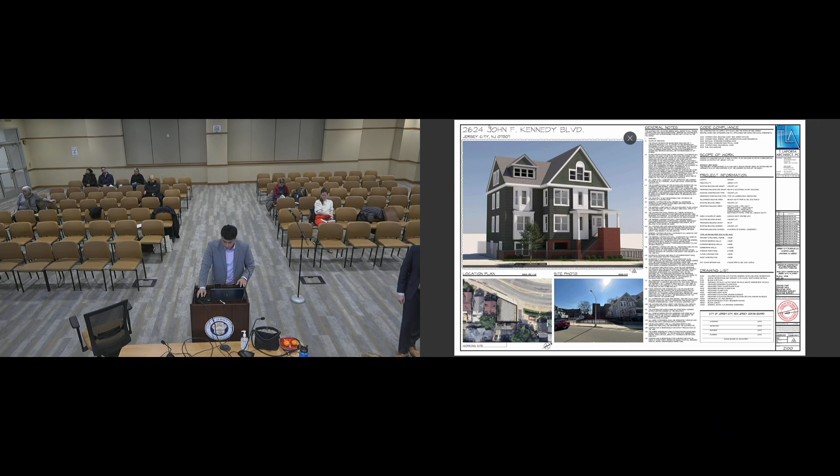Not over the weekend, but since the last meeting. Okay. Yes. All right, so am I clear to move forward? Yes, go. Okay, well, good evening everyone, I'm happy to see everyone once again. My name is Martin Moreno, as previously stated.

I'm here to speak about the revisions made to our project at 2624 John F. Kennedy Boulevard. Most of the changes were to the exterior of the building, including materials, colors, and some landscaping, based on the comments received at last month's meeting.

One of the comments that was very much stressed from both the December and the January meeting was the use of red brick. I believe it was Commissioner Bryan who brought that up. We found that in regard to the context of the neighboring buildings, the beige or light brown brick we were originally pushing didn't work as well. We decided to explore the possibility of red brick, and by doing so, we landed on using a green color for the siding, since green is a complementary color to red. That's something that worked well with the building, so we decided to move forward with it.

So the first big changes I'll touch on are the color changes, from the brown to the red brick, as you see in the lower portion of the building, following my cursor, and the green siding applied to the top floors of the building.

If you recall, we originally proposed blue and white siding for the principal bump-out area you see here, with blue siding and the recessed part of the building proposed as white siding. After we spoke with, apologies, I can't remember his name, Commissioner Sakong, I believe, he spoke about the use of paneling and how to better improve the differentiation of colors in the facade.

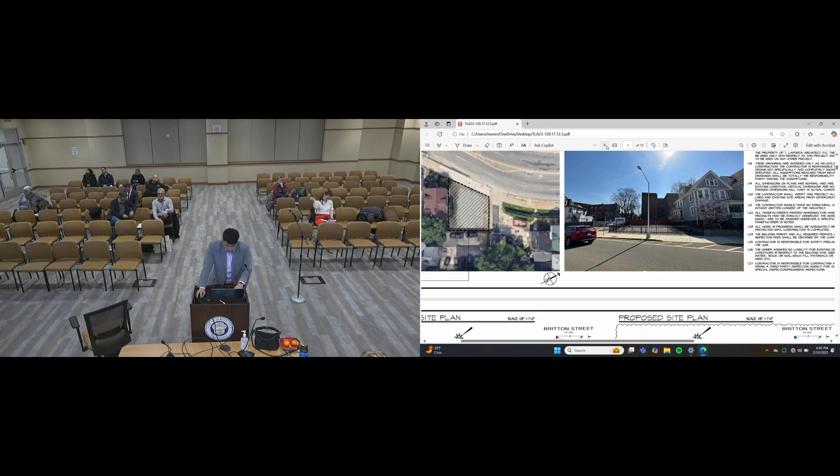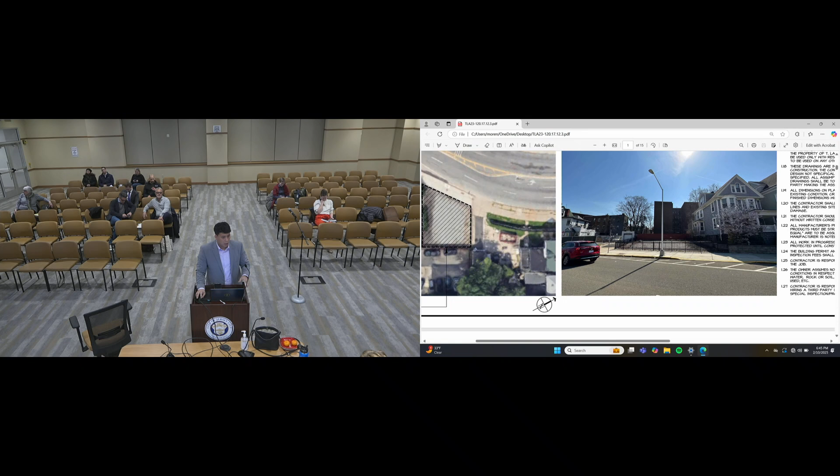If I zoom in, you can see on our neighboring building directly next to us, their bump outs on both buildings are full white cladding. It really helps differentiate from the overall grayish, bluish siding of the principal building, as well as these larger white trimmings.

Also helps the windows and different shapes differentiate from the primary color of the building. We decided to incorporate that into our project, doing both bump outs on the right and left with a similar white paneling system, and added larger trimmings around the windows to help those stand out. We had also previously proposed sandstone for the window color, but decided to make it white all around, because the sandstone didn't mesh well with the larger white trimming.

In addition, Commissioner Bryan spoke about possibly lowering the Hardie panel down a little more, to help eliminate some of the use of brick so it's not very brick heavy at the lower part of the building. We took that to heart and incorporated it here, and we felt it worked well. It really helps eliminate the heavy brick accent on the recessed part of the facade.

We also added some vegetation, as previously discussed, to help limit the brick from both the bottom and the top. Commissioner Amatuzo talked about replacing the columns in the front with a stronger brick accent, so we went ahead and did that. It's something found on the building three doors down.

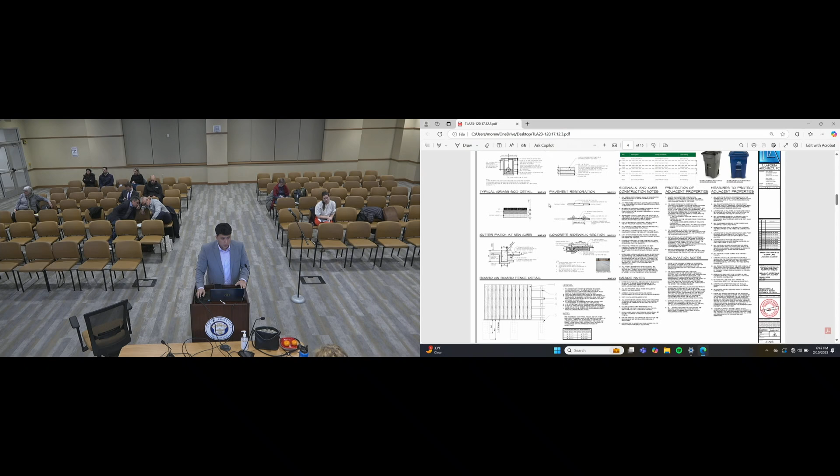As I move to the next elevation sheet, I'll highlight that. That's pretty much a quick recap of the changes made to the exterior. As mentioned, we didn't make much changes to the interior layouts of the building, so I'll move forward to the elevation sheets.

There were multiple comments about the legibility of the drawings, how they were sometimes a little hard to read given that they were 2D black and white drawings. So we decided to incorporate some coloring and add a little shading to help differentiate the different surfaces of the building.

Here it's a little clearer regarding the columns I just mentioned. As you recall, we originally had white posts holding up the extrusion of the building. We decided to change that and replace it with a much larger brick base, about 16 inches by 16 inches, something we pulled from the neighboring house two doors down. As you see, they also have a very similar feature.

Let me zoom in. They have a similar feature, not necessarily an arch, but a large brick lintel with a larger brick post on the side. So we decided to incorporate that similar accent into our building in place of those white posts we originally had.

Moving on to the side elevations, you can see how we originally had the brick going up towards the first floor. We've lowered that and added more siding, reducing the use of brick to help eliminate that strong brick accent at the bottom. We also brought that red accent all the way across instead of the previous brown brick, to match the neighboring red accents of the buildings.

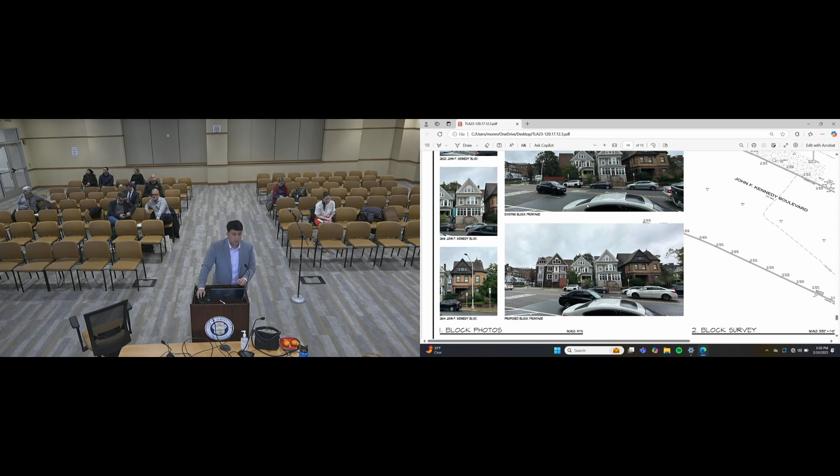Moving on to the streetscape, showing the building in context with neighboring buildings. We decided to take the rendering of the front part of the building and superimpose it onto the existing streetscape, just to give a better idea of how the new design works in context with the neighboring buildings.

That's more or less it. Martin, just a couple of follow-ups. There were two other changes I noted. One, regarding the style of door and the way the transom worked, I think Commissioner Gunther brought that up. If you could speak to that as well.

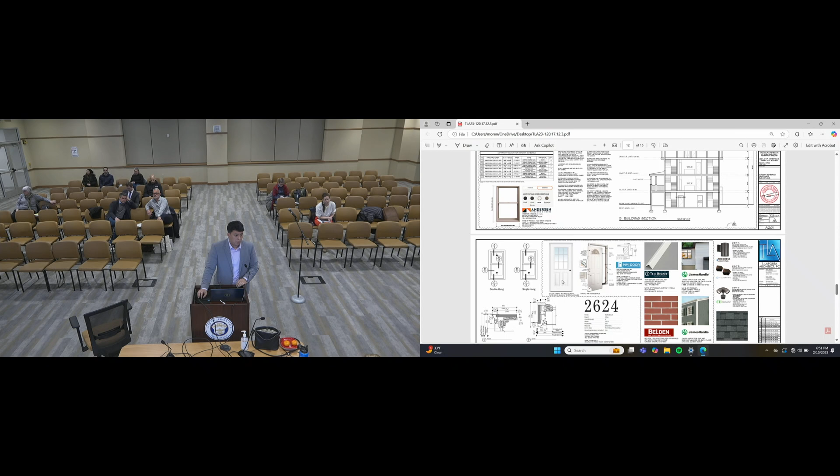I believe it was either Commissioner Gunther or Commissioner Amatuzzo who recommended doing a transom above the door to help give it more of a grander entry feel. So we went ahead and did that, and we also changed the type of door to this more 2-panel pane glass style door. It's a little similar to a barn door type, but we changed it because we felt it worked better with the new design, as well as it being something mentioned in the previous meeting.

And just to clarify, the other door beside it, if you go back to that sheet, that's just to give dimensions. The one on the right is not the actual proposed door, it's just labeled as typical details for this brand of door. This is something found in most spec sheets, regardless of what door you choose—they provide typical details for all the doors of that manufacturing company.

The last question is regarding the CMU wall—we had gone back and forth proposing it and removing it. Where does that stand based on the commissioners' comments at the last meeting? I believe based off the last meeting we felt it was best to move forward without the CMU wall and do the railing instead. As you can see here, we incorporated it into the proposed streetscape study to give a better sense of what it looks like in context, and we also added it to our rendering.

Going back to the initial rendering, we did add the railing going across the front. This low transparency point you see in the bottom left-hand corner is meant to show the fence, because we have a 6-foot white board-on-board fence going all the way around. We originally added the fence to the rendering, but felt it was covering up the window, so we made it a little transparent so the windows were more legible.

I will just note, it is written in supplementary zoning that the recommended floor to ceiling is 9 feet. Applicants have asked for less, and they are correct that the preference is general, it's recommended, not required. Plenty of applicants have come to this board before with floor to ceiling heights of less than 9 and have been approved with that. However, they are correct that they do have to go to zoning board after this, and zoning board is absolutely going to turn around and ask why their floor to ceilings aren't 9 feet.

I just think it's too tall, and the base of the building is tall. And I know you've made some moves, but it seems like reducing the ceiling height will help reduce the size of the building. As I've said before, you can see it on this streetscape. The prevailing design is a pedimented 3-story building with a basement, and I know you're putting a unit at the bottom floor, and that's causing it to be a little taller at the base than what you typically see throughout this historic district. I'm just concerned about the height.

And the other thing, I know we have these elevations, and you have a separate rendering of the building, but what I don't see, which maybe would help me feel better, is a rendering of what this will look like in the context, like at eye level.

Well, it's not necessarily a rendering, Commissioner, it's more of a superimposed photo that I previously highlighted. This was scaled to match the property. I guess for Commissioner Gunther, that is marked to scale. That is an accurate depiction.

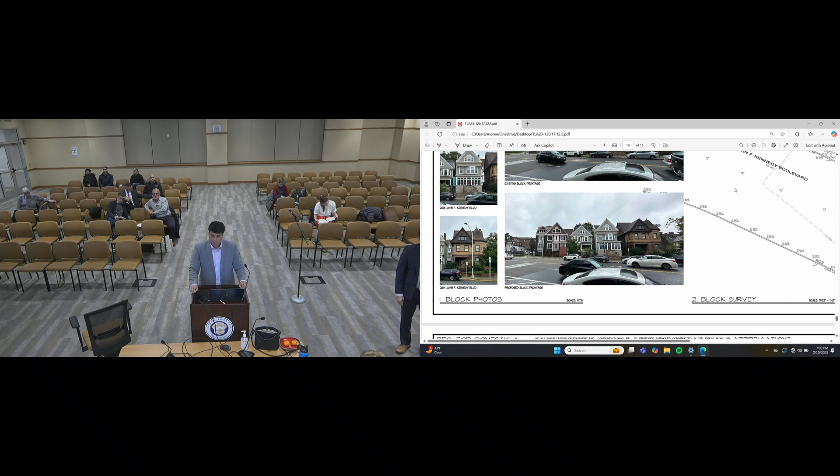I have a question for you. I like the transition to the red brick. It doesn't feel like the house is floating on a blonde foundation, it feels more grounded. I definitely like the solid all-green siding instead of the variation in color. My problem still lies with the columns across the front of the house - the extra tall one on the left versus the two short ones on the porch just seemed too imbalanced.

I was wondering if maybe putting a railing between the two porch columns, like the neighboring house has, would rectify that situation of the column on the left feeling too tall and too big, and the other ones feeling too short. Are you suggesting a railing there, like the neighboring house to the right has, with the two columns and a railing in between?

Commissioner, we had that before. Oh, you did? Yeah, and it was recommended that we change it to this. Okay, I don't remember that.

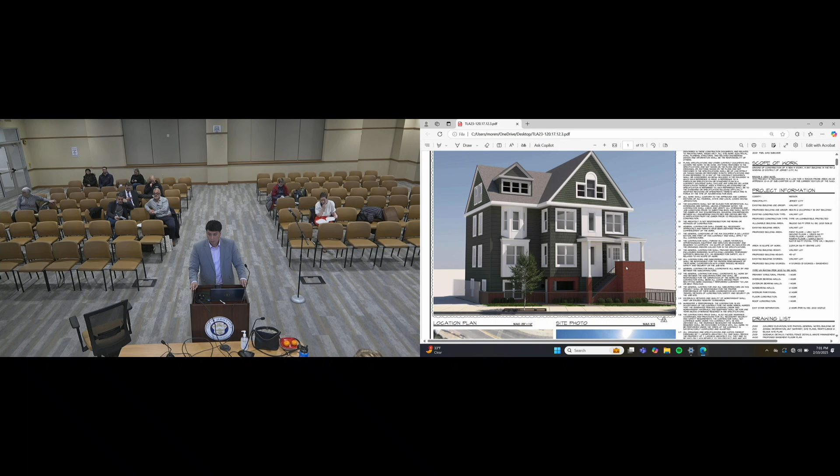And my other question is, this house is quite stately - I'm still not sold on the front door. It looks like a Home Depot off-the-shelf front door. I think that, like any entrance to a beautiful home, it should make a statement. This says to me that we found this great door at the Home Depot.

I understand, and I think it should look more like it's in context to the neighborhood. Maybe one big, beautiful wooden door with a side light or something else, but this just looks too big box to me.

Understood, but just to plead our case, the manufacturer is MMI, which is not a standard manufacturing door company. I'm not saying you can't get that at Home Depot, but to argue the point, we went with a specific manufacturer not very used for a common standard home. We decided to go with this barn door look because we felt it was a bit more traditional and fit well with the context of the neighboring buildings. But if you are still not satisfied, we have no issue trying an alternative.

Yeah, I understand you went to a company that makes it special, but it doesn't look special. Understood, it looks like big box.

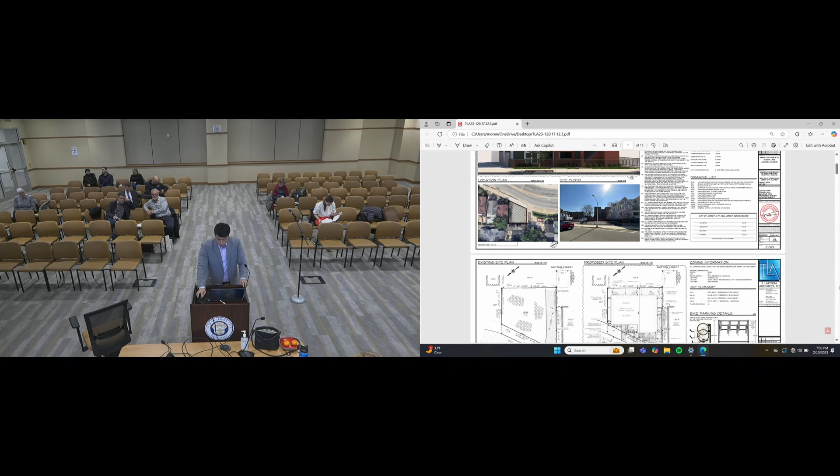Commissioner, is there a particular design you have in mind? Something with one window instead of a divided side light, like an old-fashioned door with one window and maybe some panels, instead of the grill on the front with the 9-light division. Right, because this is a 2-panel glass door per the specifications here. So rather than the 9-light thing that makes it look like it's coming off the shelf from Home Depot. Got it.

We had a development on Sherman Place, and they used HardiePlank siding and did all that, but they used a beautiful custom 3-foot wood door that looked like it belonged in context to the neighborhood. This does not look like that at all.

Sure, we can also look once again at the neighboring doors, the doors of the neighboring homes. I know two doors down has just a solid door. Yeah, as you can see here, let me zoom in real quick.

Two doors down just has a solid door. Yeah, that's not historic, the porch has been closed in, so that's not really a historic door. But maybe the house on the corner would give you a better indication.

The house on the corner is a little similar to the one that we had chosen. I think the one that's more unique is our immediate neighbor, which has a sort of oval-shaped window. So that's something we can see if we can come up with a better alternative for. Okay, yeah, I agree with Commissioner Amatuzzo.

It should be a wood door. It should be, or with a raised panel and maybe the side light. I don't know about the transom, but that maybe. But it's materially not appropriate for an entrance door.

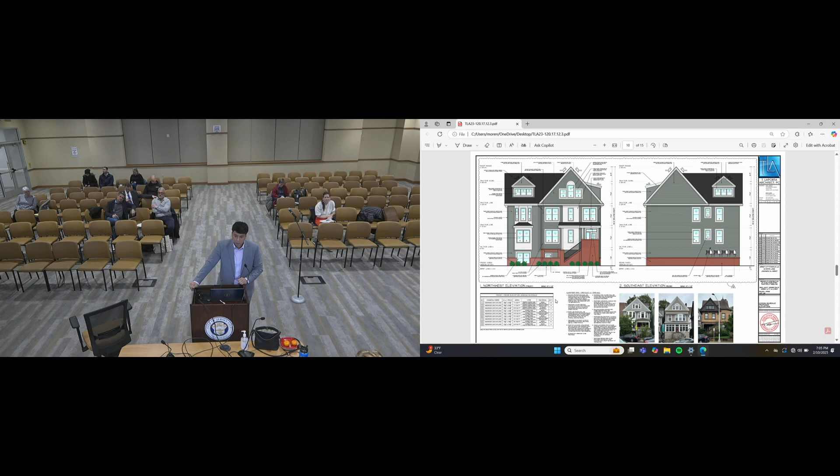So we'll take another look at that. I think just because of the style of the house and the neighborhood, it needs to be a little bit fancier looking. Understood, more like a home door than I don't know, it just doesn't fit. So a change there would be great.

Thank you. So I agree with the comments of Commissioners Gunther and Amatuzzo. My first impression upon seeing this revised design is that it's definitely a big improvement. I'm pleased to see a lot of these changes. The thing that struck me, however, was the use of the white cladding, which you said is bold and strong based on some of the neighboring properties. I do see that in the photos you shared.

But there are those two sections of the building, just to the left of the main entrance most prominently, and then on the extreme left of the front facade - that's a lot of white cladding, just broad expanses of it. I wonder if you might have gone a little too far with the white cladding. To me it seems a little odd, and I might prefer to see that pared down a bit, but I'd also be curious to hear what the other commissioners think.

To me it seems odd. Well, I would agree with Commissioner Gordon. One of the alternatives we tried was to do more of a solid green all the way around, including the bump outs, and then once again utilizing a larger window trim to help differentiate the two colors. So that was the original design we went with.

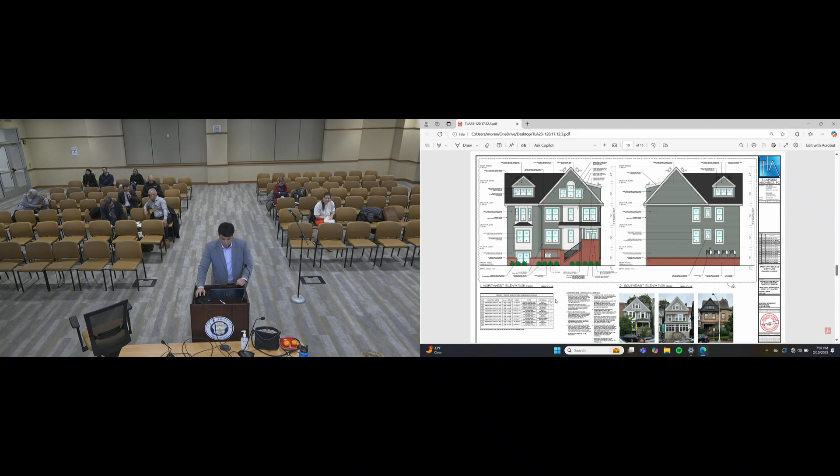One more question regarding that white cladding - is it just flat cladding or is it like a shingle? We're proposing fiber cement panels. So it's just flat and has no embellishment added? It's just a white panel with no embellishments or shingle or any kind of style. It's just flat and white, which I think adds to its largeness.

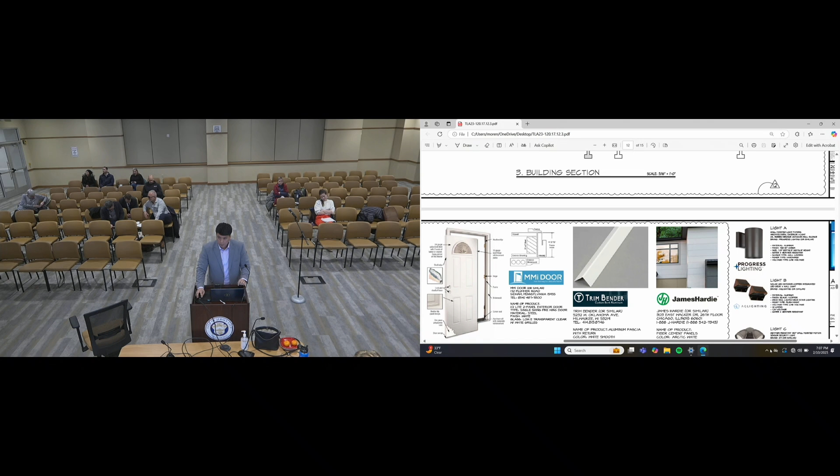Right, so this is a sample that we provided here. It's a smooth white fiber cement panel.

The neighbors had more of a vinyl plastic looking type of panel. We're proposing something a little bit different, but we understand the comment and it's something we can revisit.

Maybe a wider window would help. I'm sorry, Commissioner? Maybe a larger, wider window would help that situation. For which - oh, the bump out, the bulk white that we're just talking about. Sure, where you have a single window, maybe a wider window would help lessen the white cladding.

Yeah, I have some ideas of how we can improve upon it, so I'll definitely take those comments to mind and see what we can do. Yeah, I don't think it needs a dramatic overhaul - I feel like with some tweaking, you could be in a good place.

I was just building on what Paul and Robert were saying about this area of the building. If you used some of the shingle or scallop textures from other parts of the building, that might be enough to break up the intensity of this white part, and maybe add more shadow and texture. That might be enough.

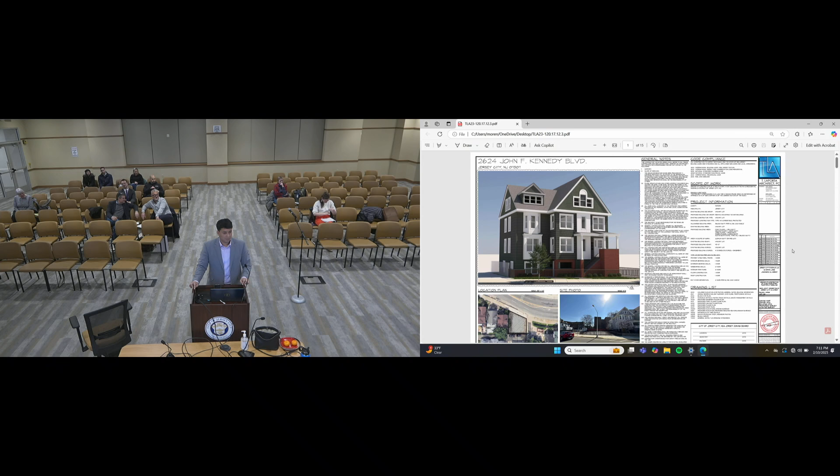Okay, no problem. So if it's okay with you, since I have our planner here, if she can speak to the commission this time, that would be great - I can avoid paying her to come back next time, if that's all right. Sure. Perfect. Okay, thank you. Thanks. Sure.

Raise your right hand. Do you swear or affirm the testimony you're about to give in this proceeding will be the truth, the whole truth, and nothing but the truth? I do. State and spell your full name. It's Carolyn Worstel, for the record. Yep, Carolyn Worstel. Carolyn Worstel. Worstel.

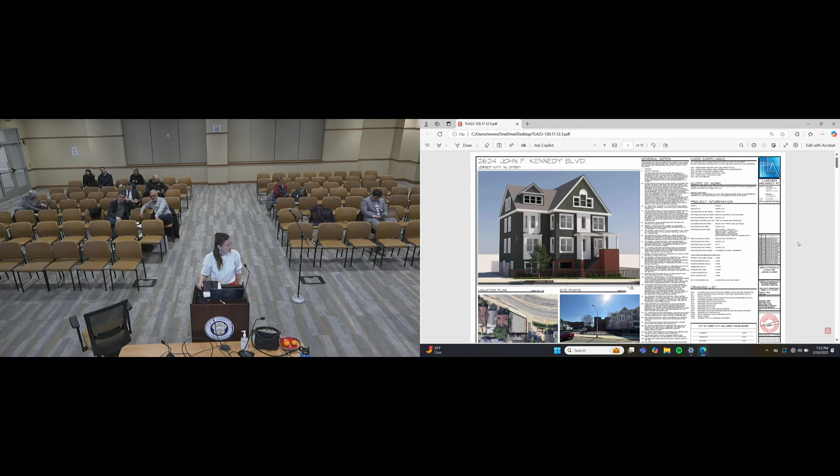Carolyn, if you could please give the commission the benefit of your educational and professional background and the status of your license in the state of New Jersey. Sure, I'm a licensed planner in the state of New Jersey. I have a master's degree in city and regional planning from Rutgers University. I've appeared before the Jersey City Planning and Zoning Board numerous times, and I just don't believe I've yet had the chance to speak before this board. Chair, I would submit Ms. Worstel as an expert in the field of professional planning. The chair recognizes Ms. Worstel as a licensed planner.

Thank you. So Carolyn, recognizing that we are going to be returning with those modifications discussed on the record this evening, to the extent that you can still give your general planning opinion as well as the context of the neighborhood and the project as a whole, that would be greatly appreciated. Yeah, sure, I'd love to.

I've been involved with this project since its very inception, really working with the team to deal with what is, from a planning perspective, a little bit of an odd lot. Everything about the Jersey City zoning ordinance is designed for narrow, deep lots. So when we're presented with a project on a lot like this, we have to say, how do we work with this lot, knowing that no matter what we're going to do, we have to go for variances? Because the lot just doesn't conform in any way, shape, or form to what is typical and what the ordinance was written for.

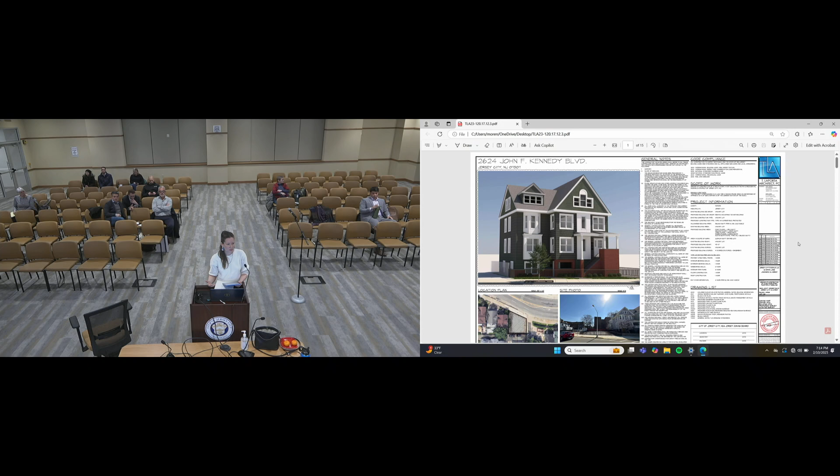And so it creates a pattern along this block where each building is stepped back, and there's this stepping. That was something we looked at when designing this building—we wanted to continue that design style, creating a building that continued that step-back pattern along the block. That was one of the things we really focused on with this design.

We also looked at the fact that we're in an area where our maximum building height is 35 feet, but the buildings here were designed and built at a time when there was no ordinance. So we tried to create a building that is consistent and creates a consistent window pattern, and a roof line that is somewhat similar, focusing on the peaks. That's how we were looking at the context.

We were trying to say, how do we create a building that is consistent with the character of that block, but also acknowledging that we're in a very different design period, with certain code and building standards different than when these other buildings were created. That's where we started in looking at this building and design, and then we really tried to meet a lot of the standards that are there.

In the Jersey City ordinance, there are standards for new construction. It really looks at saying we're not trying to replicate the building that was there—we're not trying to totally recreate the buildings next to us, but we're trying to take the character and create something that seems appropriate along that block.

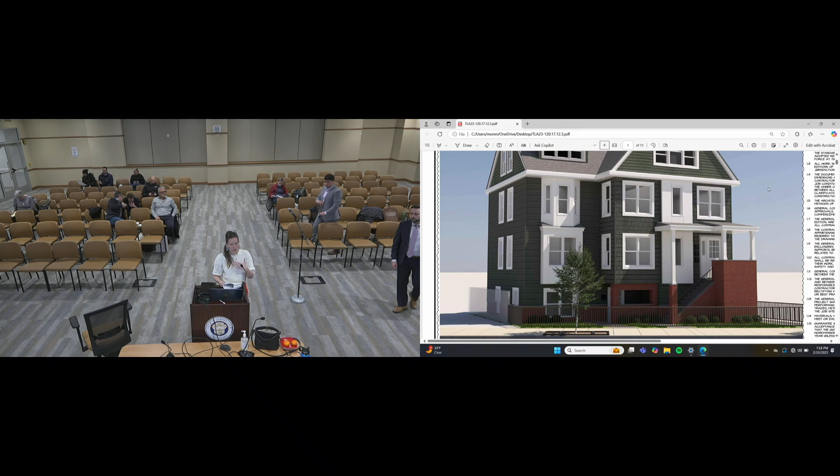Trying to use materials, utilizing the siding to create those textures and patterns very characteristic of the design of the buildings nearby—the roof forms, focusing on making sure we were creating a roof form consistent with a very strong peak, with a strong pediment. Those are all very characteristic of the three other buildings on this block. And then just looking generally at the scale.

None of these buildings are exactly all the same—they're all a little different. So you're not trying to match up and say we need our roof line to exactly match the building next to us, because that's not the character of this block. It's not a row of townhomes that are exactly the same, all built at the same time. This is very characteristic—I was reading while we were doing this, and I was really looking at that West Bergen East Lincoln Park guidelines.

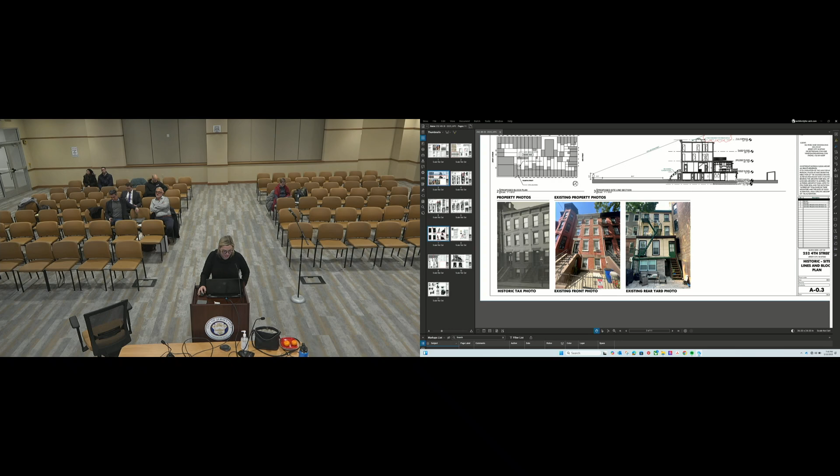Currently, I'll go back to what's existing. Currently there's a little bit of a hodgepodge of additions that have been done prior to the homeowners that are my clients. So we are actually going to demolish the existing addition that is there and add a larger addition to the back. I'm going to show you that in 3D to make it easier.

So you can see the back elevation of the existing facade. A lot of the existing facade on the bottom 2 floors where we're doing the work has already been demolished and removed over time. This addition is to include a 1-bedroom and the kitchen, along with a deck and a privacy screen, because the deck is on the property line on the east side of the property, so it's a zoning requirement now. There is a 5-foot deck off the back of the kitchen, and we will be using the HardiePlank Smooth.

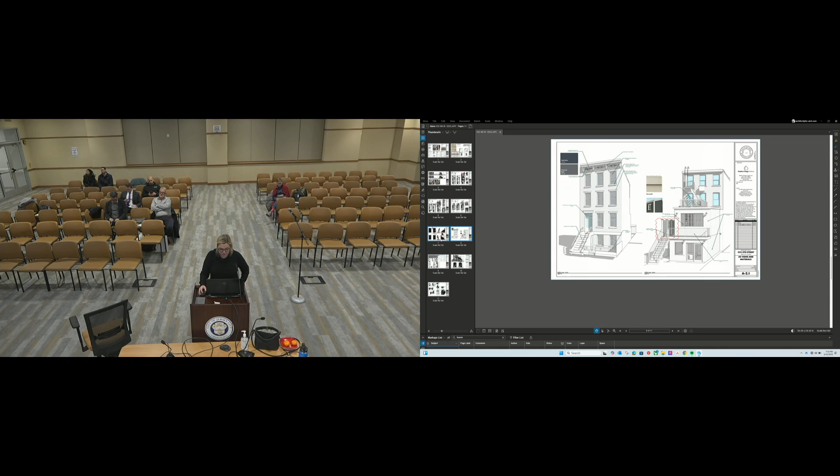I have samples if you'd like to see. It's going to be in the night gray you can see here. If anyone wants to see it, I can bring it to you. And then we are painting the cornice, and also on the front facade, besides the windows, cleaning the sills—they've been painted. So that is the majority of the work we're doing. I can answer any questions if you have.

Any questions? The addition's not visible from the public right of way at all. Public right of way, yeah.

I'm just looking at the egress. Do you require a secondary egress now? How many units is it? It's 3 units. The building department is allowing a 40-foot rear yard setback for egress. Okay.

I'm just trying to see where you achieve that egress from the top of the second floor addition. I'm not seeing it. Is it a drop down ladder? Yeah, there's a drop down ladder here. So from the top 2 floors, you come down here and then down onto the deck and then out. And you got approval for a drop down there?

Well, it's new—I have to go to the building department after this. Okay, so we'll find out there. We had a drop-down ladder before, so... Yeah, that's what we're hoping. That's my only question. Thanks.

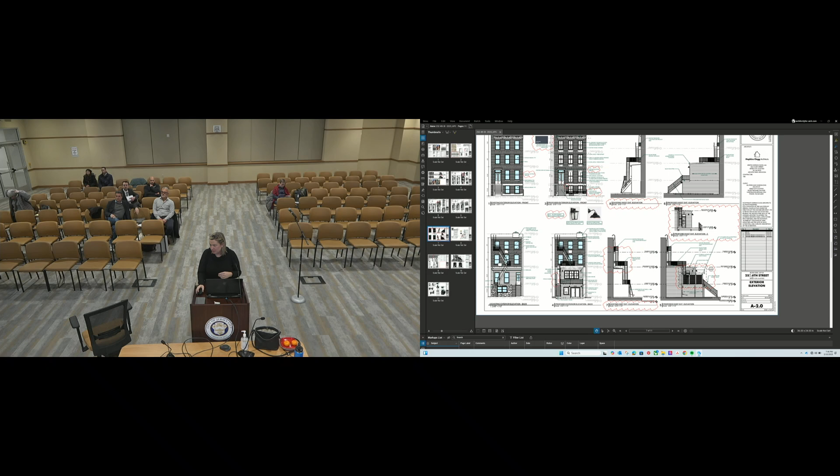Okay, we will do a roll call vote. Commissioner Amatuzzo? Aye. Commissioner Guria is absent. Commissioner Sankamp? Aye. Commissioner Gunther? Aye. Commissioner Sakong is absent. Commissioner Blazak is absent. Commissioner Cronin? Aye. Vice Chair Gucciardo is absent. Chair Gordon? Aye. Okay, we have 5 yeas, 0 nays, 0 abstentions. The certificate of appropriateness with conditions is approved.

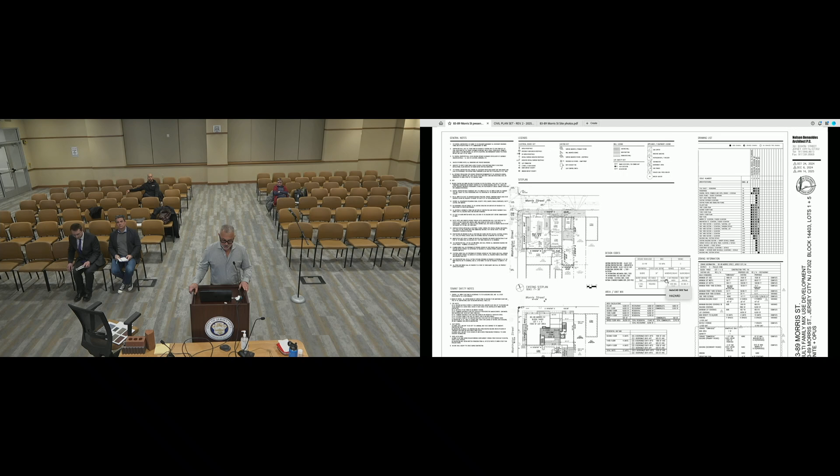Take it away. Good evening. I wanted to introduce 83-89 Morris Street. The project is 13 residential units with 2 or 3 ground floor commercial spaces, which would be including restaurant use. Sorry, this is moving all over the place. The current lot consists of an existing 3-story building, which contains a ground floor restaurant and 2 residential units.

And then the existing building extends almost all the way to the rear yard lot line. Excuse me, pardon me. It extends to the rear, what I'm calling a rear yard line, but it would appear to be, it's currently zoned based on the zoning description as a side yard. Then there's also an empty lot, which is the long 25 by 100 foot lot.

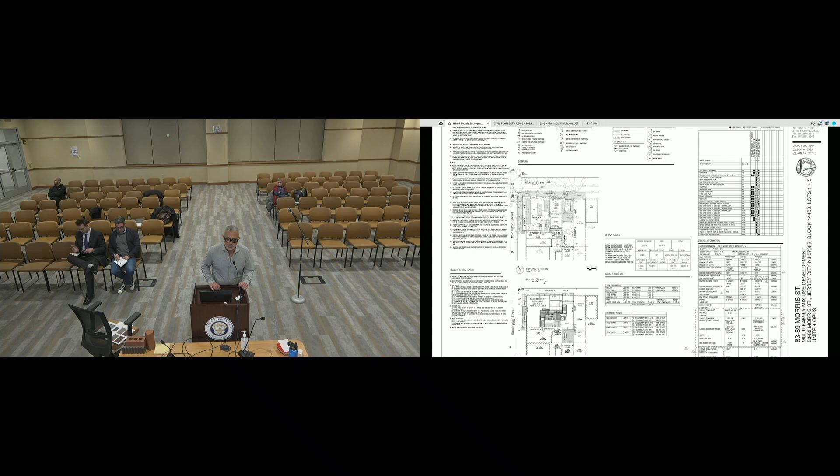We're looking for variances for building coverage and height, as described by Stephen Joseph, among some of the other variances. So the proposed building is a 4-story building, which would contain 13 units. The new building, which surrounds the existing building, would contain 12 units, and the existing building would contain 1 residential unit. The ground floor restaurant would remain, and the new building would contain the building lobby for the residential unit and the commercial space for an additional restaurant, which is an expansion of an existing use.

The following drawing shows the existing block diagram, showing the existing building here and the empty lot that's on the corner and on the side. The proposed building completes the corner, encompassing the existing building. The building would be 4 stories in height, leaving the existing 3-story building in place. And the side drawings are showing the existing block elevation with the existing building in place, and then the proposed block elevation, which shows the 4-story building.

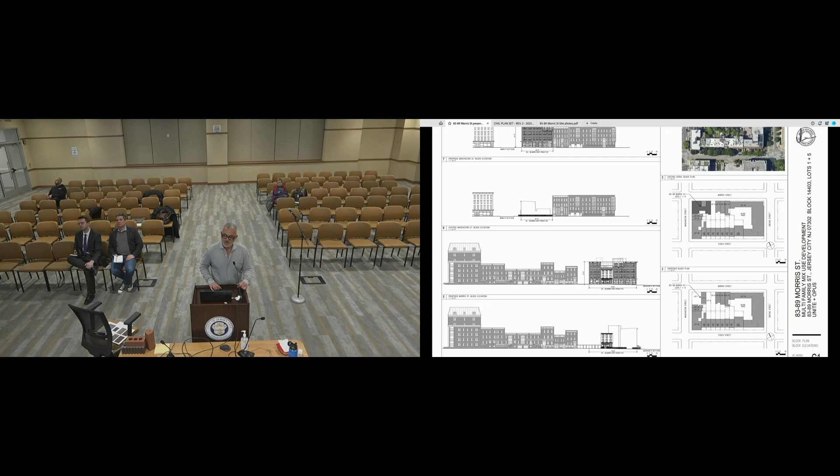This would be the Washington Street elevation, and on Morris Street, the existing Morris Street elevation is here with a larger, 6-7-story building on the corner, and the existing standalone townhouse, a 3-story townhouse here. And the proposed building would basically be the 4-story building surrounding the existing 3-story building. There is currently an empty lot adjacent to it, which is not part of this project; it's under different ownership.

So we are proposing completely renovating the interior of the existing building, since it would be a different layout, removing the old rear yard addition completely, and reconstructing the sidewalls of the existing townhouse, but preserving the front half of the existing townhouse to maintain its structural stability.

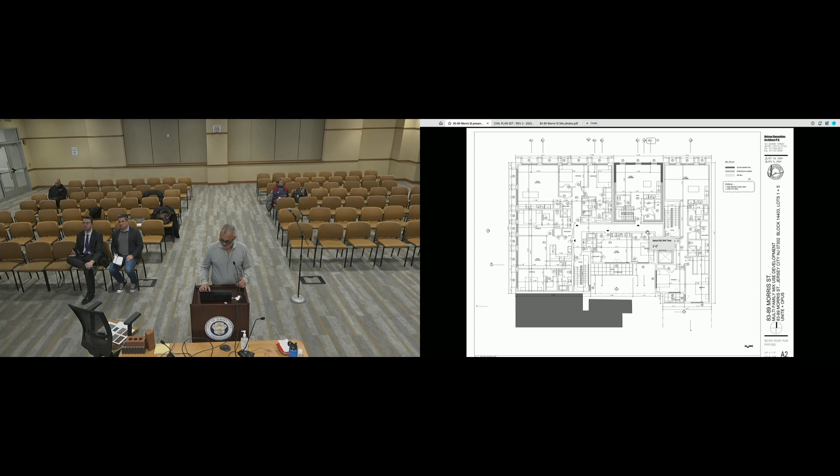We have a 2-bedroom unit on the empty lot, which extends from Morris Street to the rear yard. And we have 1 small 1-bedroom unit in the rear, and 2 other corner units. The 1 corner unit is also a 2-bedroom, and another 2-bedroom apartment on the Washington Street side.

All the units have basically frontage on the street, with the exception of just the 1-bedroom unit in the back. And the unit in the back has a small balcony to introduce some outdoor space.

All the floors, the apartment layouts are the same, except for the duplex in the existing building. The building does change on the top floor. We changed the massing on the top floor for

the corner unit. We stepped back adjacent to the existing 85 Morris Street. So basically, since the floors don't align for the existing building versus the new, there's a setback at the top floor to create a small terrace.

There's a small addition over the existing building, basically a penthouse bulkhead stair, with then a terrace on the roof of the existing building, which is also set back.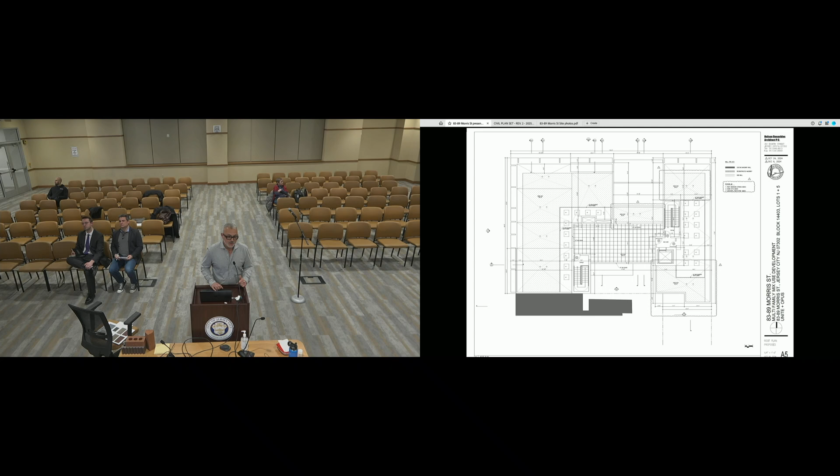And on the roof, we have basically a small centralized roof deck with the 2 means of egress and elevator. The perimeter is surrounded by green roof and mechanical utilities. There are no interior spaces on the roof other than the means of egress staircase and the elevator.

This is the elevation on Morris Street showing the new building sandwiching the existing building. I'll include the materials for the facade.

The primary facade is two types of brick. We have two tones. The field brick, essentially, that brick is a fluted special shape brick.

Which would be along the perimeters. And the infill panels below the windows would be a combination of two bricks, which would be a special shaped brick and a same color brick, which would be a solid brick in a standard brick profile.

I'll go through the overall elevations, showing you the details of it. So essentially the facade is consisting of two tones of brick.

There you go. Solid brick.

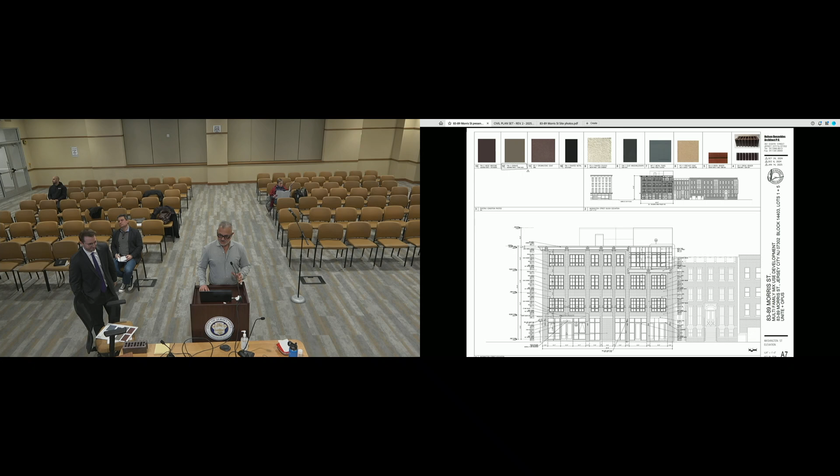This is the Washington Street elevation, which continues the corner. Again, we break down the individual bays, where the corner is basically a mirror of each other, then it breaks down to a different bay for the middle, and on the end, to continue it to the adjacent existing townhouses, we lowered the cornice and created a metal panel system above it to reduce its appearance and bulk.

These are the sections. This is the section through Washington Street, showing the outline of the existing townhouse to the left. This is the rear yard, where it's a simple facade with large windows and doors, and terraces with railings and balconies.

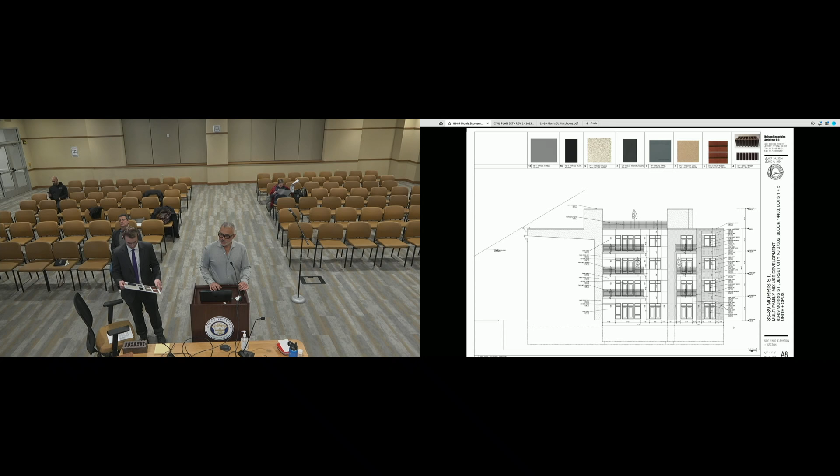On the right-hand side is the long empty lot, where we have through units with 3 floors of residential above the ground floor. The materiality on the back is a smooth Hardie board panel for the middle section in the courtyard, and on the rear yard facade of the empty lot would be brick, similar, using the red brick for the back.

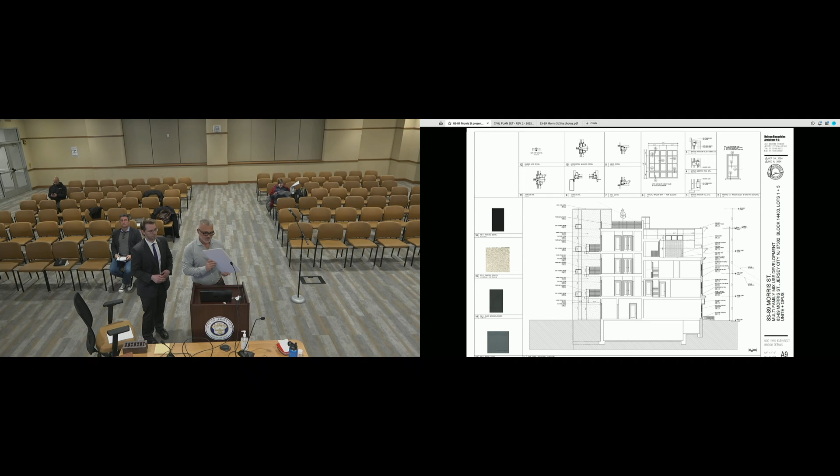These are proposed color schemes for the existing building. I'll go back to that on the renderings.

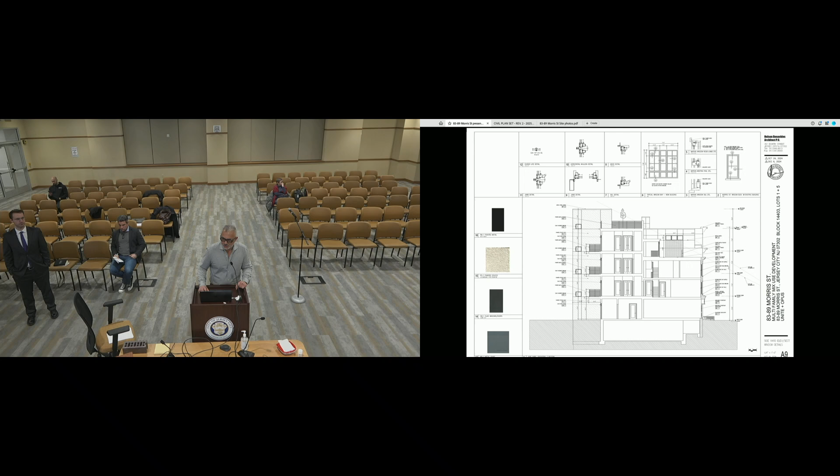This is the section of the building through the existing building, showing the existing cornice line and the sight lines from the building, through the building. The roof decks are not visible from that sight line, including the existing roof terrace on the existing building, and then the new roof deck on the new building. Here you can see that we respected the interior floor lines of the existing building, and the new building has a different floor-to-floor height.

Again, there's another section showing through the existing building and the new building seen beyond. We are returning the brick on the side facade and then introducing a metal panel on the interior part once it's about 10 feet away from the street.

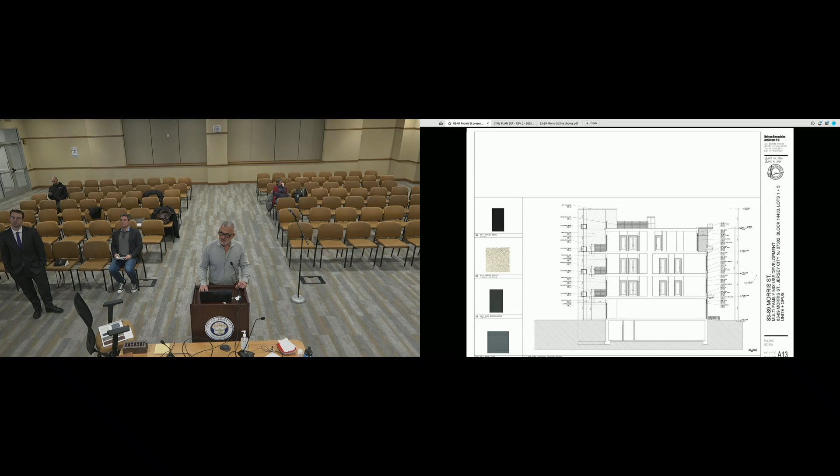This is a section, again, going back to that section repeated. This is a section through Morris Street, showing that the roof deck is not visible from the full 4-story height. This is a section again through Morris Street and the residential entry, where no roof deck is visible there. And this is a section showing the setback at 87 Morris Street, which would be on the 4th floor outdoor terrace on the front of Morris Street.

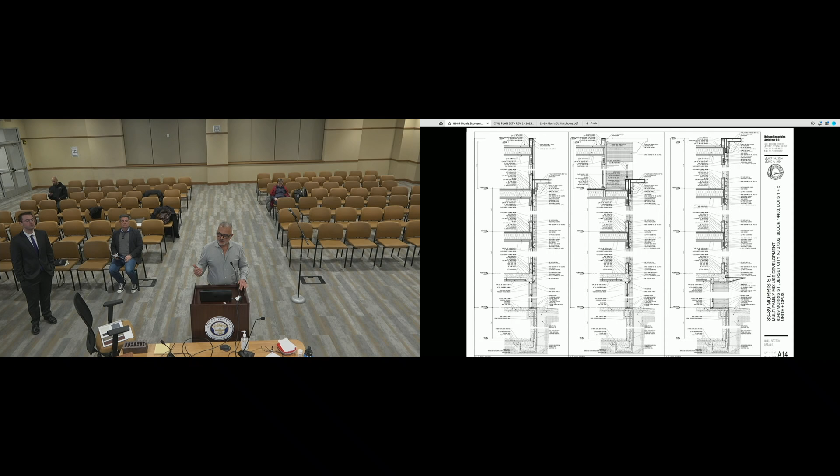These are basically the wall section details of the facade. We're showing an alternating pattern using different types of brick, modulating the facade where it has punched openings of large windows that are recessed back, the three-dimensionality of the brick, and the play of the alternating brick pattern in the individual bays.

These are section details of the cornice - sorry, not the cornice. Here I have the canopy for the corner unit and for the residence, including some signage that we'll be using, mostly blade signs, and then the signage on the canopies.

This section here is a section through the existing building, showing the restoration of the storefront and how we're melding the two different constructions together with the new construction and basically reconstructing the interior of the building.

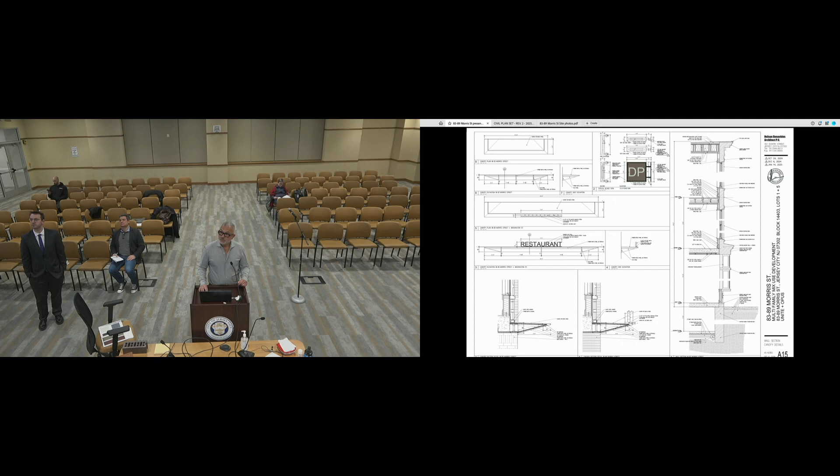The window heads and sills are going to be this precast material in a sort of a buff color, like a limestone color. And that's also then continuous and banding throughout the entire building.

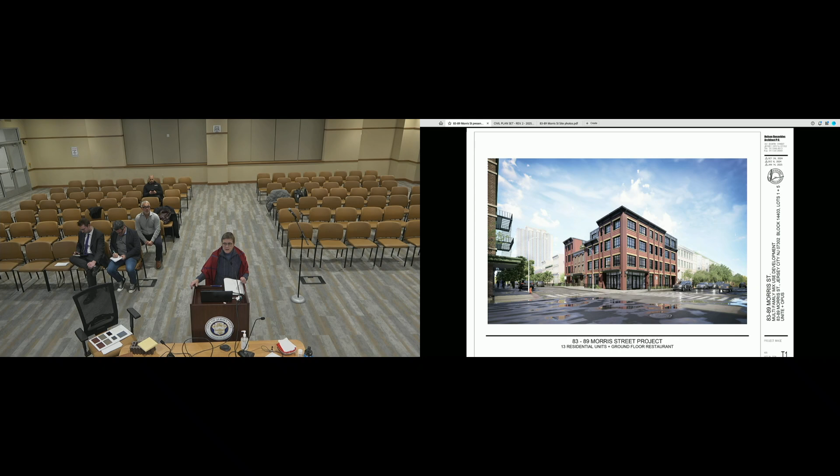I'm here speaking for the Historic Paulus Hook Association, who has reviewed this application. I also wear kind of two hats, because my house is adjacent to this property site, so I'm well aware of the details of this project.

First of all, I'd like to say thank you. We have worked with the developer on this quite a bit over the last year or so. We worked extensively with the prior developer and basically have no qualms about the size of the project. It's been brought down in units, but unfortunately what we lost in units, we gained in no parking. So we now have 13 units with no parking, which none of us are thrilled at, but we're very happy to see this corner finally addressed after many, many years.

There are a couple of things that I just want to note for the record. One is that the garbage all comes out on the south side, on the small sidewalk. It needs to be very carefully monitored and dealt with there, because otherwise it's going to end up on the residential properties to the south.

You have two outdoor spaces, one of which is essentially an active yard. The other appears to be off the commercial kitchen area and off the commercial restaurant area, and it also has access from the community space of the building. So the question is, is that going to be outdoor seating? The neighborhood certainly would prefer that it's not outdoor seating for the restaurant. I know that's not yours, but it's a problem for us, as we dealt with the last restaurant there who used the deep lot as one of their places to throw their garbage on a regular basis, and the noise associated with it.

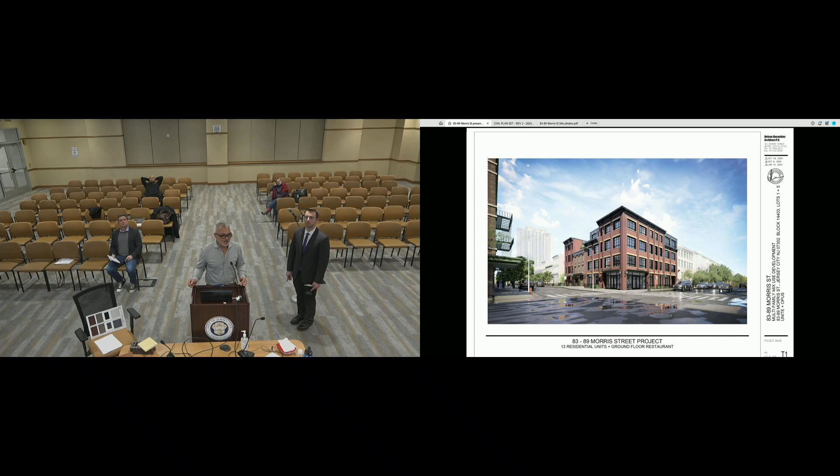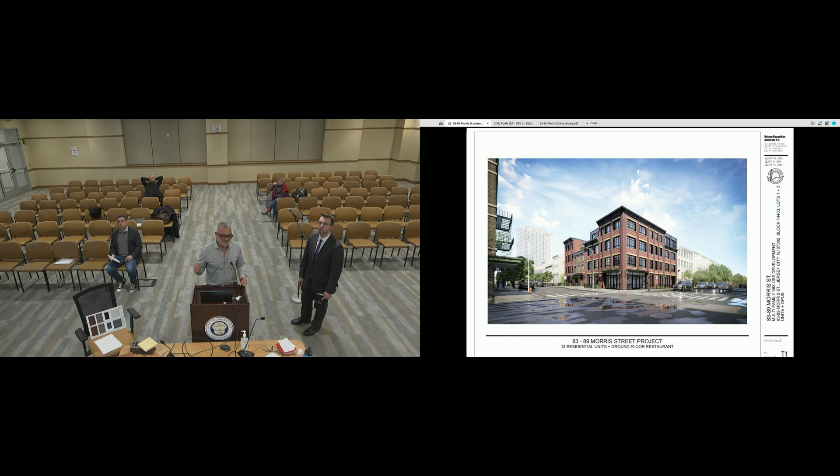The tone of the cornice is not just black, it's going to be more like a charcoal blue-gray. These renderings are really hard to achieve realism with, so unfortunately we have to go back to the actual material to make that connection. The existing cornice on the building will be painted a dark brown, which is traditional for this neighborhood. I think blending in the red-brown tone of the wood windows and storefront will work with the purple-brown fluted brick. That's the primary approach, going with a more traditional red but using a different shape to make it unique. In my opinion, that's what really brings this building to a different level that we don't often see in this neighborhood.

So that would be my comment. No, I do enjoy the design and the textures. I just, at least in these renderings, am a little bit concerned about the dark windows and the dark cornice relative to the historic building.

I understand that based on the renderings. Renderings are, I don't know if you sat through them, it's really hard to get it exactly the way you want, just based on the time of day that the renderer picks. There's all these issues we're dealing with when it comes to doing this. We're not there with photorealism, at least not me yet, to get it that way.

And was there another comment? Okay.

I was going to say that the existing building is not portrayed well in the rendering. It comes off as sort of bisque. Yes, yeah, it's really a red brick building.

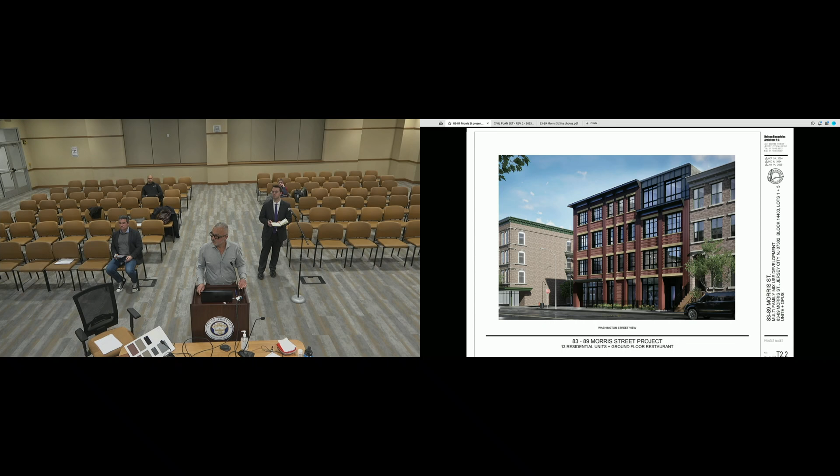And I'll just interject here. I don't know if this is on. No, you have to tap it on. It's green. How about now? No. Super duper. Okay, sorry for interrupting everyone.

I just want to focus that the board's commission review is not on seating permits or things like that, or garbage. I think it's difficult when we're looking at what these buildings are, and people are going to be here and living here and doing things, but the commission is focused on the considerations in the ordinance. So if we could just keep on that.

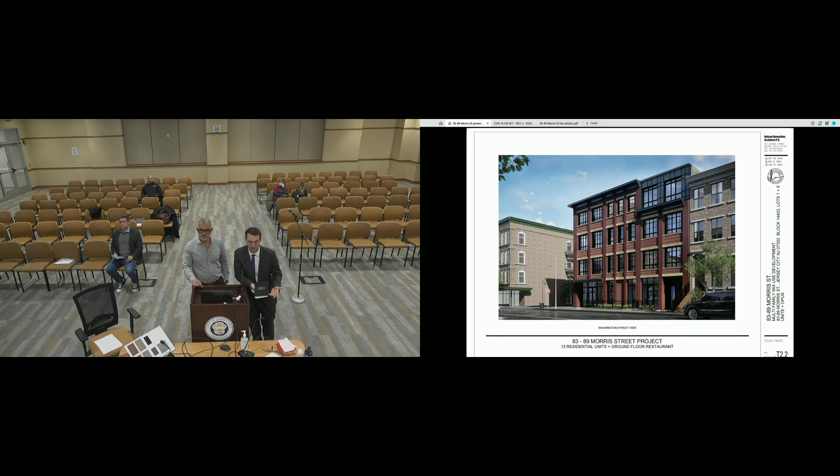I think it is relevant to know because it is one of the conditions of approval in staff comments, that these commercial spaces so rarely have tenants and fit outs and everything ready to go at this stage, right? So things like signage and layouts and even sometimes the number of commercial spaces can change, and that would require tenants coming back to this commission, and potentially to the zoning board, once there's a specific fit out for each of the spaces.

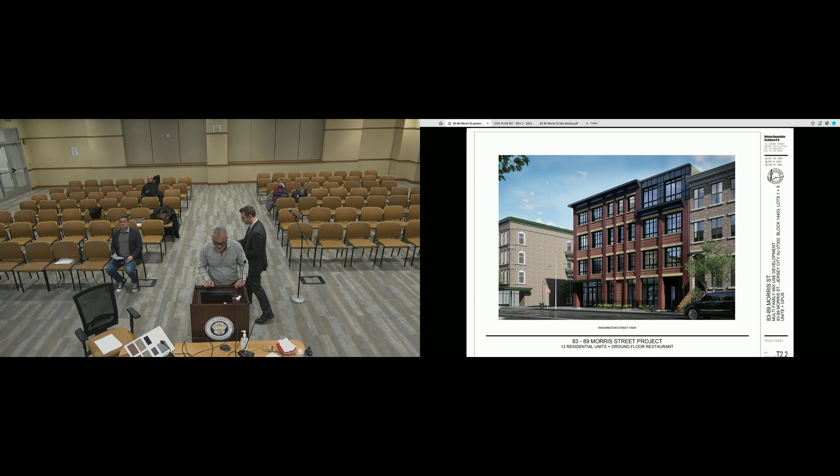Sure. There was a comment that the handrails need a cap and they're rather thin. Yeah, I have details showing that, and we do a flat top, articulated top rail on the front yard fencing. I could show you those drawings.

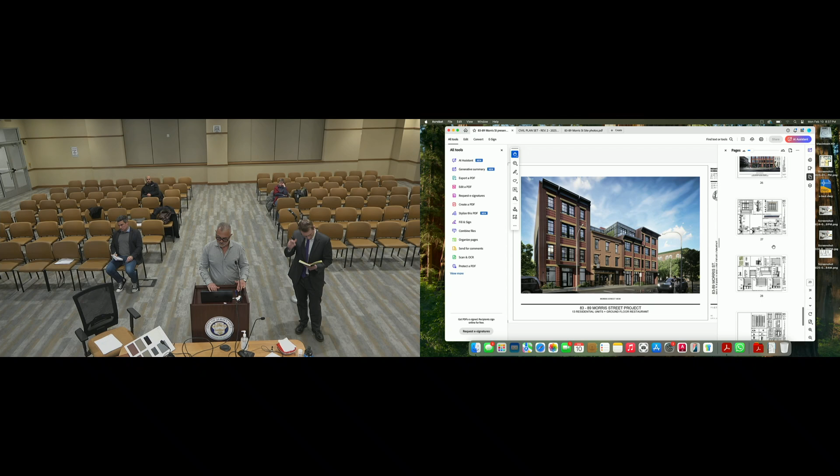That would be here, the top right-hand corner. This is the standard or typical railing for the front yard, and this would be the railing detail as well.

There was a comment about the railing. I think that came up because the rendering appears to have a sharp picket, which was a rendering change or something overlooked. But the detail drawings specifically call out this detail, which is the intention: a painted iron fence, non-aluminum, matching the existing railing on the existing building, which is a picket with a vertical and no flat top.

Now that we've got that clarified, there was a comment about the 6-foot fence closing in the block. We want to maintain the donut and ensure ventilation for light and air. The owner agreed to discuss what the fence should actually be. I'm showing a 6-foot-high cedar fence, whether solid board tongue and groove or shadow box, but that would be for the owner to discuss with the neighbor. The ownership doesn't particularly matter to us, so we're happy to work with staff and Diane on whatever's suitable for the fence.

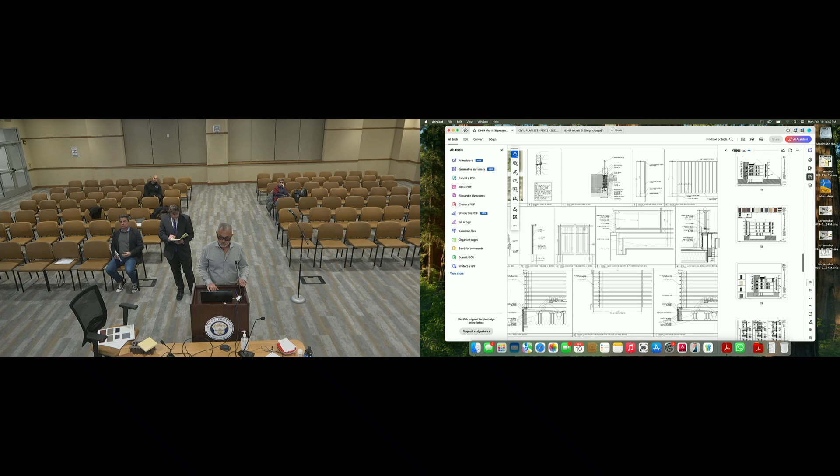The next question was one I also had, about how you're taking the rear off the historic building and attaching the new structure to the existing one. This was taken into consideration highly when doing the initial design—I reviewed this with structural engineers and we discussed it, knowing the reality of construction.

I had an experience in New York City reconstructing a 3-story wood frame historic facade where the entire building had already collapsed other than the facade, and it was about to be pulled down. We were able to remove the entire interior, reconstruct it in modern materials, and preserve and reconstruct the facade. Since it was wood frame, it was a little easier to handle.

But in this case, since it's a brick structure, what we're proposing is reconstructing the sidewalls. What we're going to do is preserve the front 10 feet of the existing brick, because we're not excavating the first 10 feet for the structure. Let me go back to the cellar plan.

When constructing the cellar, we're stepping back about 8 feet on the side, because the existing cellar goes down around 7 feet, so we're on a 45-degree angle. We're not excavating near the front of the building to preserve as much of the original structure as possible. Beyond that, the sidewalls are reconstructed with new foundations and new masonry walls, and the entire interior is reconstructed as well. None of this is visible from the new building, but essentially we are keeping that line—so it's still an independent structure, but with a new structure on the inside.

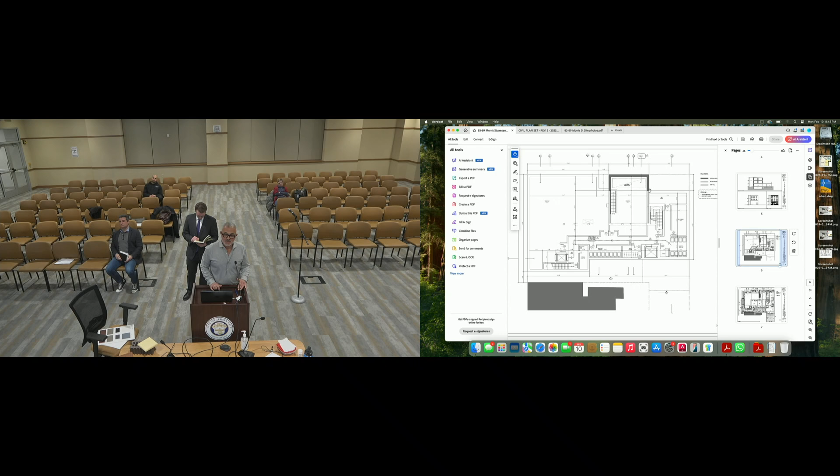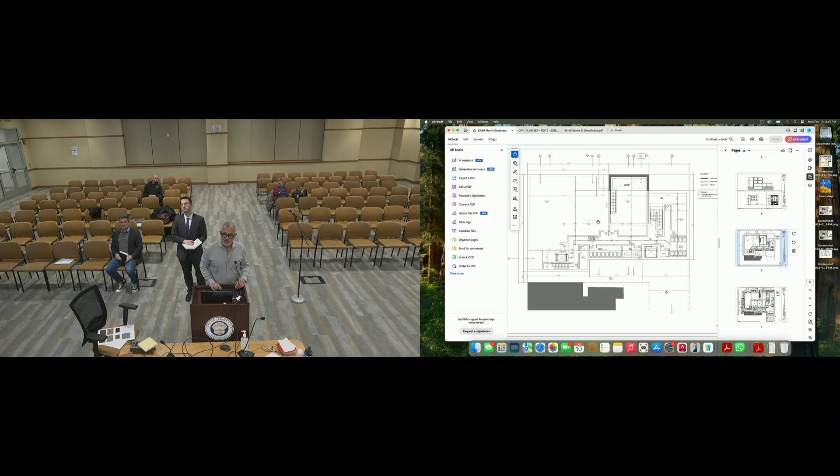The front part of the building, even in the cellar, we're not excavating the foundations at the front. We're going to bench it, step it down. So we're keeping the original cellar at this point, and then we're lowering the cellar floor to match the new building towards the back.

Does that explain it, or do you need me to elaborate a little bit more? Do you have the details of how the new structure will be joined to the remaining original structure? Yes.

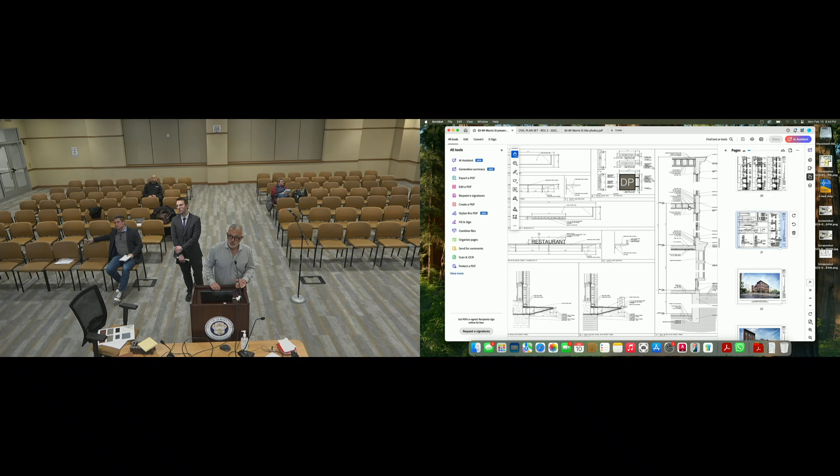So this is the existing facade on this wall section here. We're doing new wood frame on the interior floors. Are you able to zoom in a little? It's hard to read. Yeah, sorry.

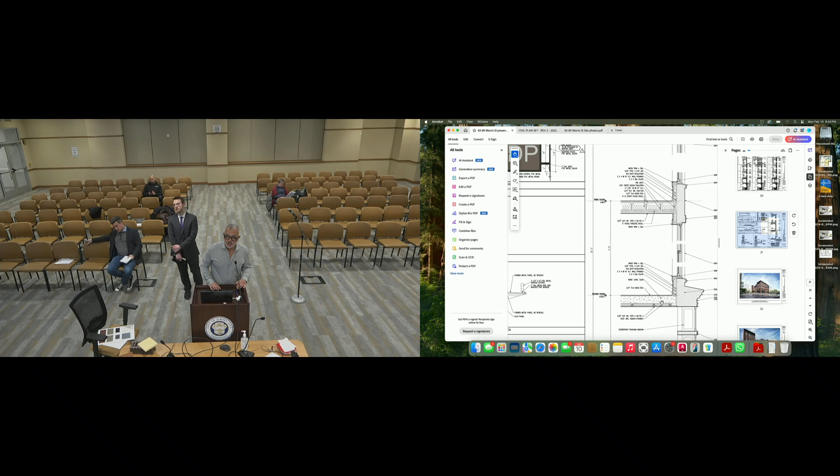We're doing TJI construction on the interior, TJI wood frame floor structure and roof structure on the interior, two floors. The second floor is going to be some sort of concrete structure, separating the commercial space from the residential.

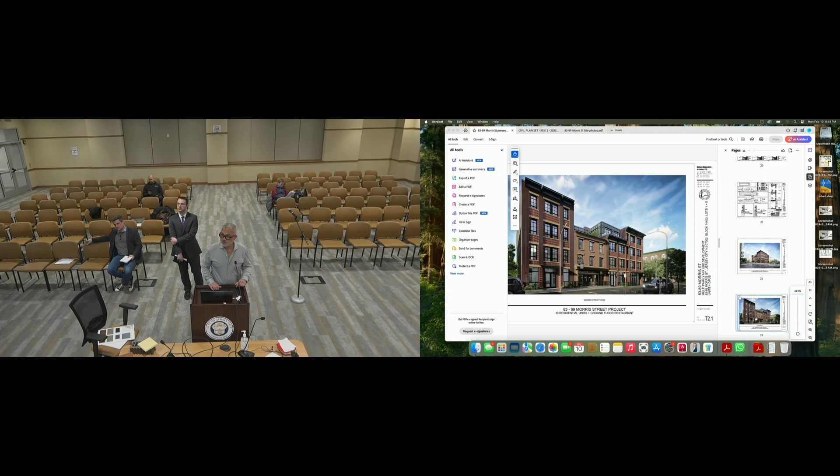Okay, I think, unless anybody else has questions, I think we're ready for staff comment. And judging by the looks in my direction, no one else has any questions. All right, we have the staff report.

I do just have two clerical typos that I've got to address on the record. The first is that the case number on the staff report is wrong. It should be H24, not H-22. The second is that in the project proposal and background, it is not owned by 445 Jersey Ave SPE LLC, although everyone can tell what staff report I used as my base document. It should be this owner as reflected on the landowner verification form on the application and on the agenda.

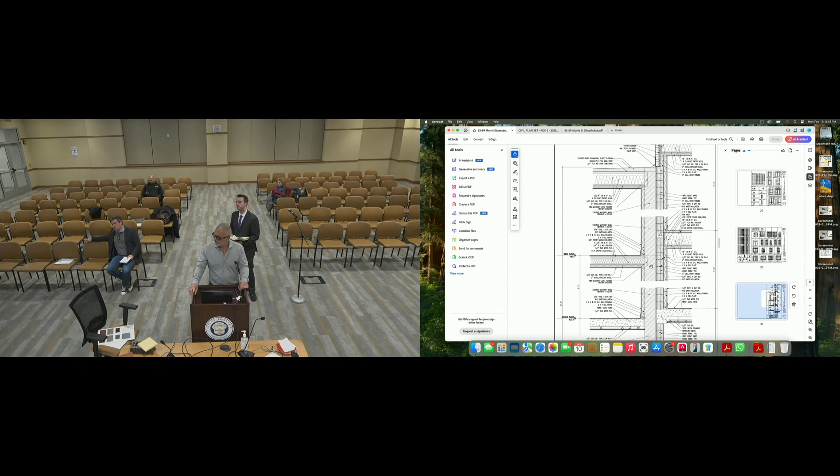All right, moving on to staff recommendations and comments. In general, we are supportive of this application. This commission has seen and staff has seen many a proposal for this site, and we are always in favor of putting something here. This happens to be a very good version of something. We think it's a well thought out design. We think it does a good job of connecting the historic building with something new, and we do think it's contextual for the block.

They are asking for a series of variances. We don't think any of them are particularly crazy. There's, of course, the use variance for the multifamily, which we see a lot of because we don't permit it. There's a couple of smaller variances that are relatively low key, and I think are satisfied, or not satisfied per se, but are necessary in order to have a project that is contextual.

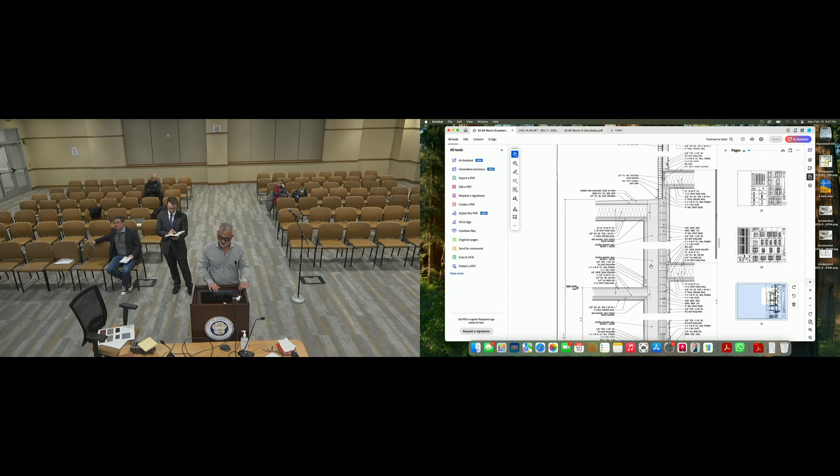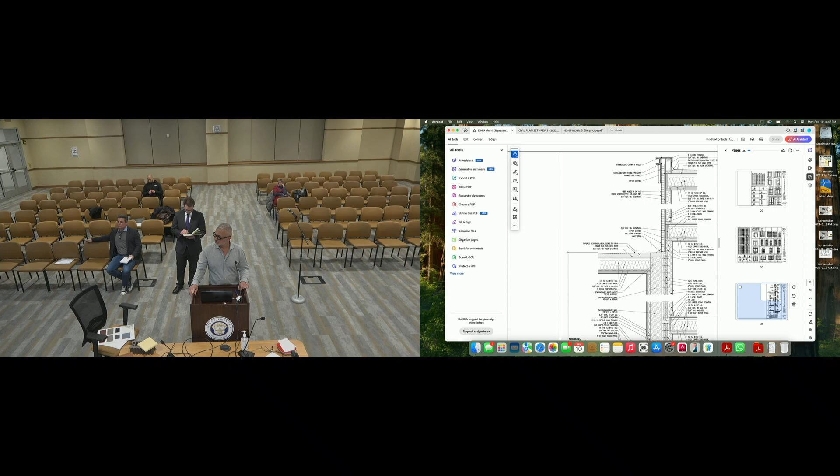We do think that there are, of course, some details that need to be worked out. They have been raised this evening, almost every single one has been raised this evening. So I think we have a pretty good list of them that will need to be either slightly modified or expanded upon at the time of construction documents. But yeah, overall, we think it's consistent with our design standards. We think that it's a good project, and we do think that the HPC should recommend the project to the zoning board and approve a COA.

We do have conditions that are being proposed. Some of them are standard in nature, some of them I'm going to go through. The first is that all lighting on the roof deck be standard, to keep everything downcast. The second is a standard roof deck condition, that no portion of the roof deck or the terrace fronting Morris Street, which is technically a side yard, as Stephen or Nelson explained, should be visible. That's why that terrace is abiding by the 10-foot setback at our request. They don't technically have to meet it because it's not the primary facade of the building, it's a side terrace. But anyway, nothing should be visible from that roof deck, trees, umbrellas, anything like that.

The exterior lighting on the facade of the building, this is not something we typically see, but there is a lighting ordinance in the city that says all of the exterior lighting needs to be 1 foot candle or less at the property line. That is less important for a rear yard, more important for a front yard. Just keep everything downcast, and that's not an issue.

We have the intercom condition, which is just that we're putting things into the brick mortar. I recognize that this is a new building, and that is something you typically see on historic buildings. However, if we put everything into the brick mortar, when they eventually have to change the technology, we're not going to have holes in the brick.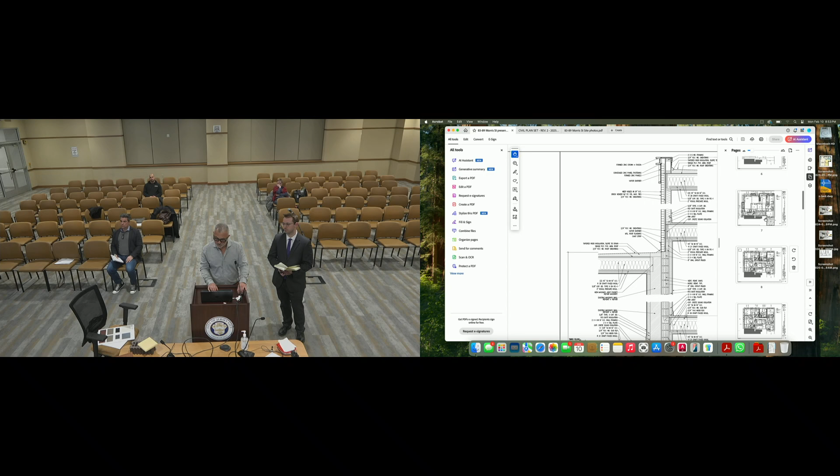Would you be able to do the foundations for the new building without redoing the foundations for the existing historic building? Is that feasible? That is not feasible.

Nelson can attest to this, how many questions I've asked about it. With the soils report, and the existing condition of the cellar, I wouldn't even call it a rubble wall. It's a porous wall that needs to be reconstructed. Underpinning isn't even an option there because it's in such poor shape. The front part, because it's the street wall, appears to be in probably the best shape, but the rest, including the back wall, I'll take you to the existing.

I would like you to go through the existing. So on the existing, this is the line of the existing rear yard wall at the ground floor. That wall has basically been completely removed. On the upper floor, it's preserved in place.

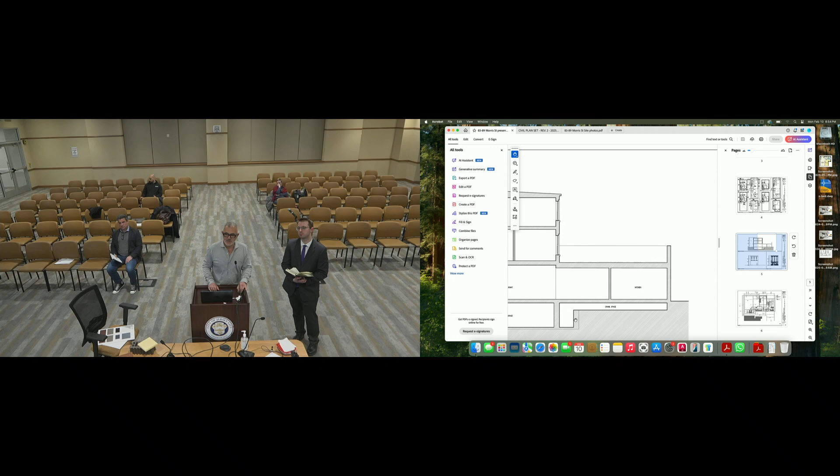The existing wall, there's probably steel there, but it was done years and years ago, and we expect that condition to be poor. At the cellar level, just go back. Here you'll see, at the cellar level, they essentially excavated out the backyard to have access to some sort of crawl space where the kitchen was built.

This whole wall here essentially, I use the word porous, it's in poor condition. The mortar has basically been completely removed or deteriorated. It's virtually not there. And we found this condition all the way towards the back. The issue is, over time, the two adjacent buildings next to it were removed.

There have been years and years of just water infiltration in this area. So every attempt is being made, structurally, by benching back the front ten feet of the building, by not excavating, at least in sequence. Once the new building foundations are in place, then selective excavation for grade beams can be done to safely build next to this historic building. So that's been taken into consideration highly.

I preserve the outline of the building, basically knowing that we're trying to maintain it as much as possible. But I'm being upfront and realistic based on consultation with an excellent structural engineer that's had many projects built here in Jersey City as well. That's been our professional opinion, our professional conclusion on this. We didn't take it lightly.

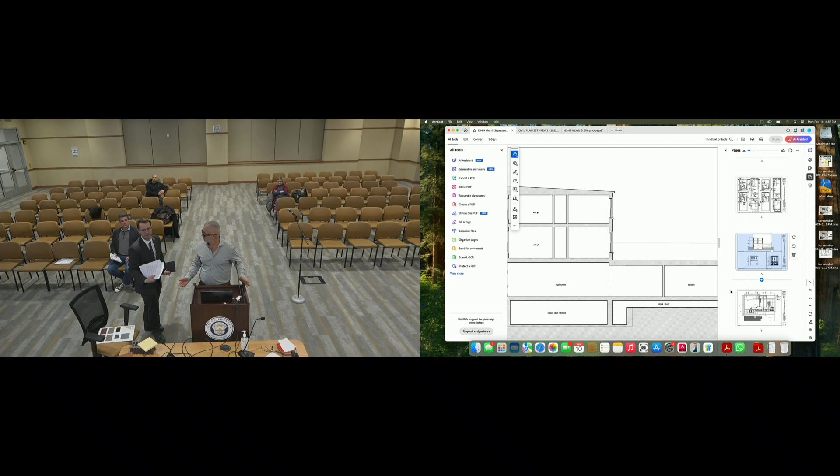So do we want to show, Nelson and I could both represent that there's an engineering report that exists. We could enter it if we want to, but if we don't enter it, we don't know the content, what is it actually telling us? You have an engineer's report saying that this is not stable, we cannot stabilize this structure. Something to that effect, for the entire structure, yes, the back half.

Okay. We can mark it as an exhibit. I don't think we have the capacity to review it on the spot right now. That's not a realistic expectation, I don't think. Exhibit A1, engineering report dated January 29th, 2025, prepared by JAG Engineering. This will be A1 in evidence. Thank you.

Nelson, can you also go through and show the line of reconstructed wall versus the whole set? Yes. Wait for this to come up on the screen. So this dark gray line here, that would be the existing building and the existing cellar slab. The gray lines here take it all the way back. This would be the reconstructed wall and reconstructed foundation. And then the back wall, since it doesn't really exist above, we're just creating columns to support the floor structure above.

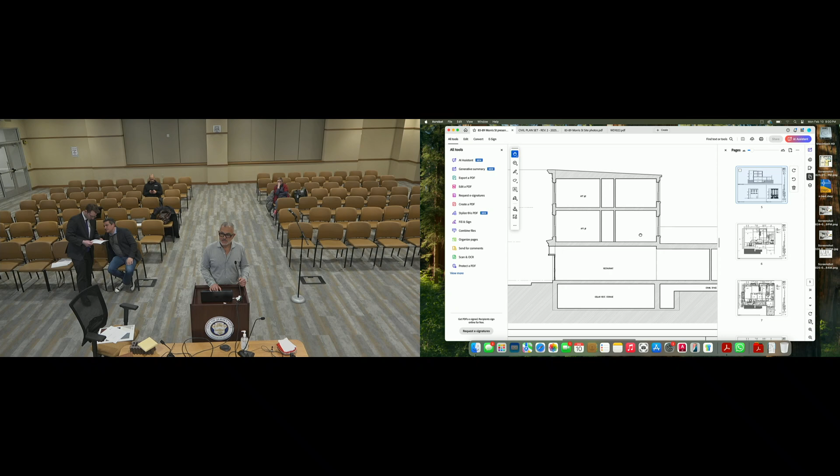Well, these are the drawings of the existing, so you see the profile. The existing condition of the building on the upper floor is in terrible shape. It's essentially been an abandoned apartment that is probably 50% demolished. There's an existing apartment on the second level, which is in poor but livable condition. Then there's the current restaurant on the ground floor, and the cellar. The actual history I don't know much about, other than it was probably built in the 1860s. It looked like basically a typical storefront with living above, a relatively small, modest building.

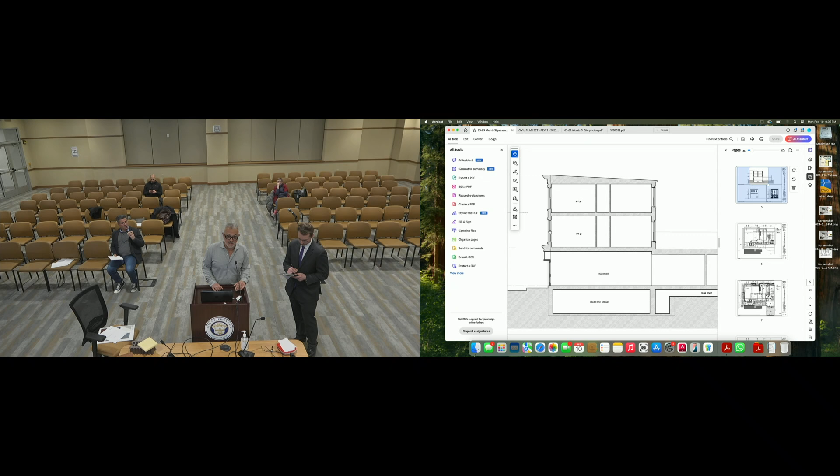In general, the facade is in great shape. The original wood cornice is in place. The tin cornice at the storefront is in place. The existing storefront looks like it was modified over the years, but it's a typical storefront in relatively good condition, so we don't see any issues with the front facade. The existing brickwork on the facade has been well maintained. The sidewalls, since it was originally sandwiched between two other buildings, have not been maintained, other than some stucco paint put on that probably isn't even watertight. So that's what I would describe.

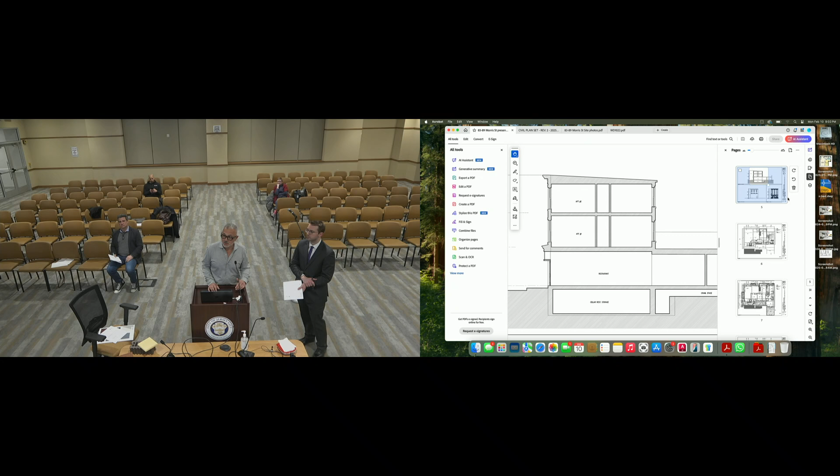Would you say that any reuse of this building would require substantial reconstruction, renovation? Besides the foundation, the internal structure of the building—

Considering the small floor plate and the introduction of bathroom and kitchen, the joists are in poor shape. Just walking through and seeing the existing plaster that's been removed and patchwork—so in my opinion, to build a new building around this original structure, it would have to be completely restructured on the interior. Obviously, working with a structural engineer, we'll consider if sistering joists in the front, first 10 feet, is sufficient to support the new floor loads. But in my opinion, just going through the building, even preserving the proposed layout requires reconstruction of at least the perimeter walls.

So is that what you're proposing, to reconstruct these portions, or are you going to be demolishing portions and dramatically changing the envelope of the building in places? I'm not clear.

On the upper floors—so here, this is the cellar, we're reconstructing the base. On the first floor, we're also reconstructing the sidewalls, creating new openings since it's a new structure. On the upper floor, we are reconstructing the sidewalls and the rear walls. So you're reconstructing it but introducing new openings? Yes.

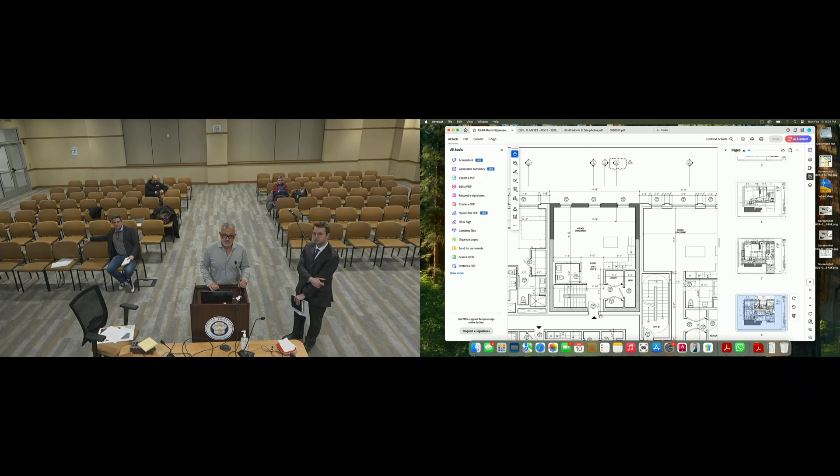I guess I would ask if staff has any precedent, any other examples of this. So we do see applicants come in having to reconstruct walls—this is a common thing, especially in buildings that have been around as long as most in the historic districts. In the context of a new building being built around it while reconstructing, that's something we see less. But they are keeping it in the same footprint, right? They've gone through this; there are also existing plans earlier in the set that show this as the footprint.

The first floor is really where we see the most dramatic effect of this, because you have the new openings on the sides. We're ignoring the opening on the back because there's a whole addition there right now that's a non-historic addition that's coming down, so that opening was always going to be there.

It's the introduction of those new openings on the side that connect to the other spaces, right? So, like I said, this is not necessarily an easy fix. The walls need to be stabilized regardless.

If someone had come in with an application for this building where you have that 1-story addition in the rear, and they said we want to add 2 more stories on top of this, that's a pretty standard application. Based on their testimony, you would still have to do reconstruction. It's just a larger part of the rest of the project is so large that this seems like it's a lot more than it is, I would say.

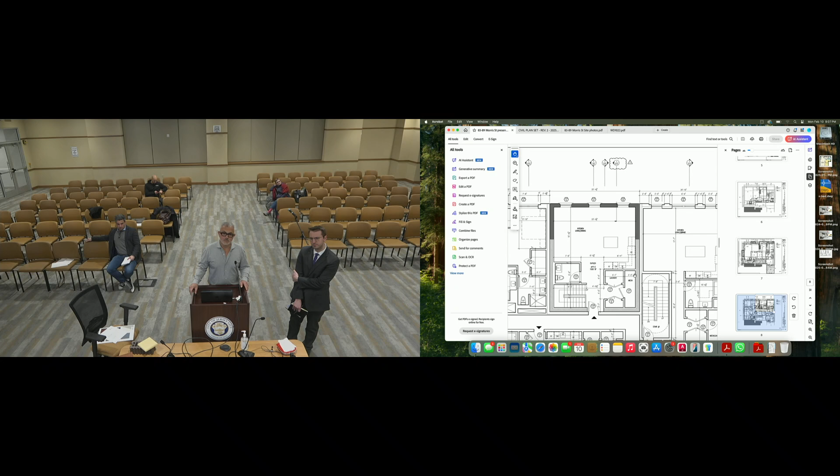Well, I don't think we would need to reconstruct any portion of the building if we weren't building a new building around it. And then once we're reconstructing those walls, that kind of opens the door, so to speak, to creating new openings.

So I'm going to go ahead and take a leap forward, and I'm going to disagree with you there. Let's say we did not have an application for one person developing this lot and the next lot, because that's what this is - lots 1 and 5, they're next to each other. Say in an alternate universe, purely hypothetical, lots 1 and 5 were owned by different people, and someone wanted to develop lot 5.

Based on their testimony, for that person to develop something completely separate from this building, you would still need to address the foundations on this building, because you would not be able to do anything over there on the next lot. Now all of that is purely hypothetical, basing it on their testimony with an engineering report that I got 10 minutes ago. I'm just saying I don't think it's necessarily true to look at it in a vacuum where we're saying we would never have to reconstruct these walls if we weren't doing this project, because I don't think that's true based on their testimony.

Can I make one other point? If we were trying to avoid reconstructing this, I think we would end up with a building that would not satisfy the commission, where we would end up with, whether it's a 3-foot or a 5-foot alley on the 2 sides of the building, to essentially not touch the sidewalls of this building. There would basically be a terrible building with 2 alleys, completely separating this townhouse from the new building.

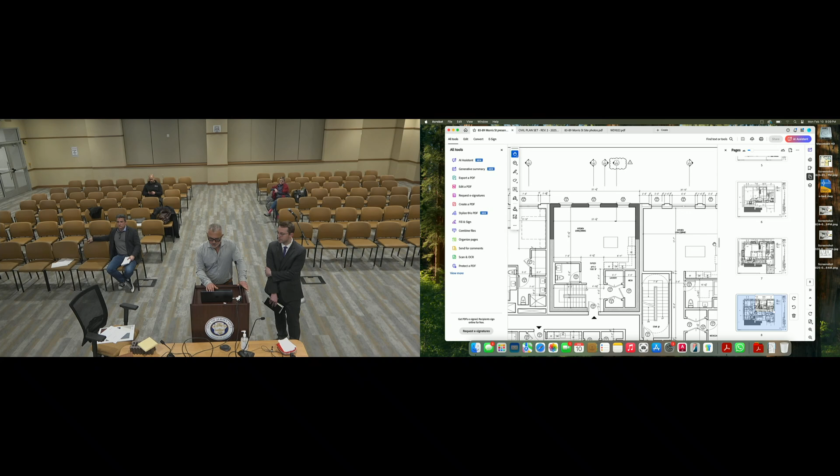Do you have the tax card photo on the set? The tax photo? I know it was like a crappy one. I'm just looking for context on what was on either side. I know this is neither here nor there, but out of curiosity, do you remember what was the most recent approved, just generally? Because I don't remember if there was any reconstruction or partial demolition last time.

In the previous application, the 2018 application - that was my first one. That application had a host of issues that I don't need to dive into necessarily now, but they also had partial demolition proposed, not to this extent, but they also had a very different scheme for the cellar that the applicant has already testified was not technically feasible. So I think it's a logical assumption to make that perhaps the applicant did not properly assess the feasibility of the foundations.

And for what it's worth, they also could have deteriorated in the 6 years that they were untouched. Could you put a condition in to work with the applicant to preserve as much of the original structure as possible based on what they find in the field? Sure, I think that's reasonable.

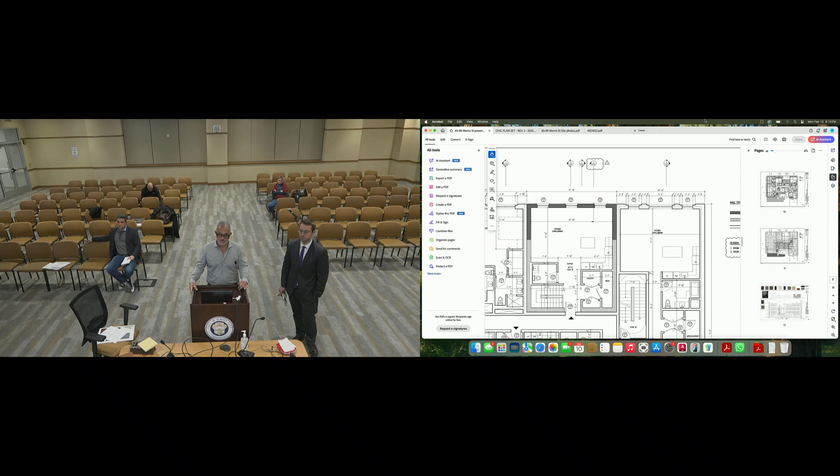So something like: the applicant shall work with HPC staff prior to the submission of construction documents to determine feasibility of preserving additional exterior walls of the existing building, or existing exterior wall area.

Does that work for you? Me, yes, okay. There's no objection from the applicant. Cool.

So then we'd be adding that condition, and we'd also be adding the condition for the stabilization plan to be submitted at the time of construction documents, which, for what it's worth, you would need to get permits anyway, but I do want it specifically written out.

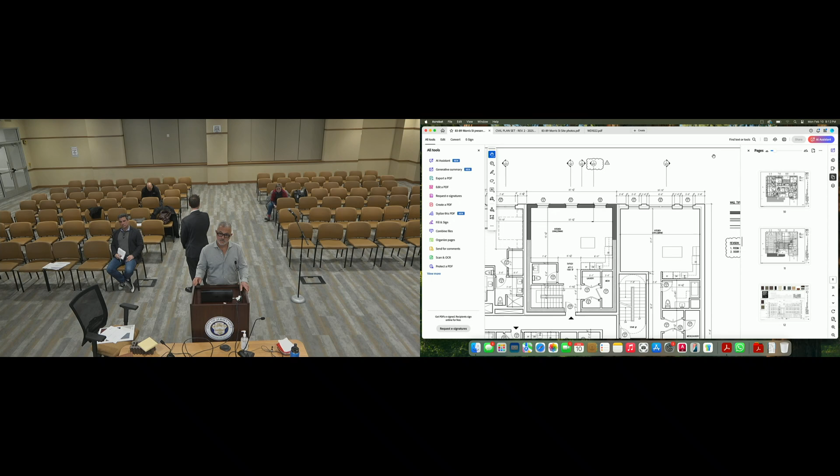Does anyone want to make a motion? I'll make a motion with conditions. Second. Okay, and just to be clear, that's approval of COA with conditions and recommendation for approval to the zoning board? Correct. Okay, and that's Paul. And Janelle, you are the second?

Okay, Stephen, does your client accept the conditions in the staff report as read into the record? Yes, all the conditions are acceptable. Okay, great, we'll move to a roll call vote.

Commissioner Sankamp? Aye. Commissioner Gunther? Aye. Commissioner Amatuzzo? Aye. Commissioner Cronin? Aye. Commissioner Griega is absent. Commissioner Sakong is absent. Commissioner Blazak is absent. Vice Chair Gucciardo is absent. Chairman Gordon? Aye. All right, there are 5 votes in favor, none against, with no abstentions. COA and recommendation to the Zoning Board of Adjustment is approved.

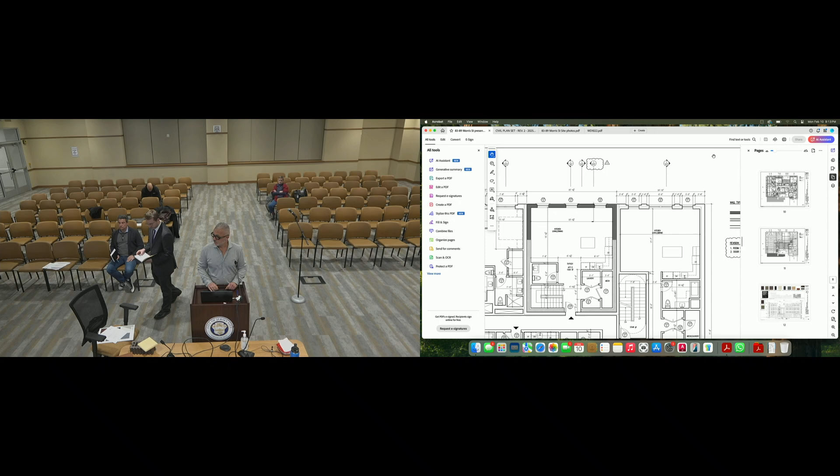Thank you very much. Thank you. Thank you. All right.

Continuing on, so we do not have any demos on the agenda tonight. Table cases. Oh, and we do not have any update on 172 Belmont, the tabled case. We do not have any updates on that.

Yeah, the demo case that's listed on the agenda requested to carry once again. We carried them, not necessarily, they asked to be carried to the next HPC meeting. We carried them to an unspecified meeting date. It increasingly appears that they do not have their act together and do not know their path forward. So I don't think it's a worthy use of staff time to touch base with them once a month. So when they are ready, they will come back to us.

And if we reach July, you can also make a motion to dismiss. Make a motion to dismiss. All right.

Or do you want me to handle this? Go for it. Okay, so it's right around that time of year, or every 2 years, we do have to make a committee for, that says March election of officers, that should say April. Election of officers, we will, as we do every 2 years, elect a new chair, vice chair, and secretary. So we need a volunteer or two to bring us a name for who wants to be chair and vice chair.